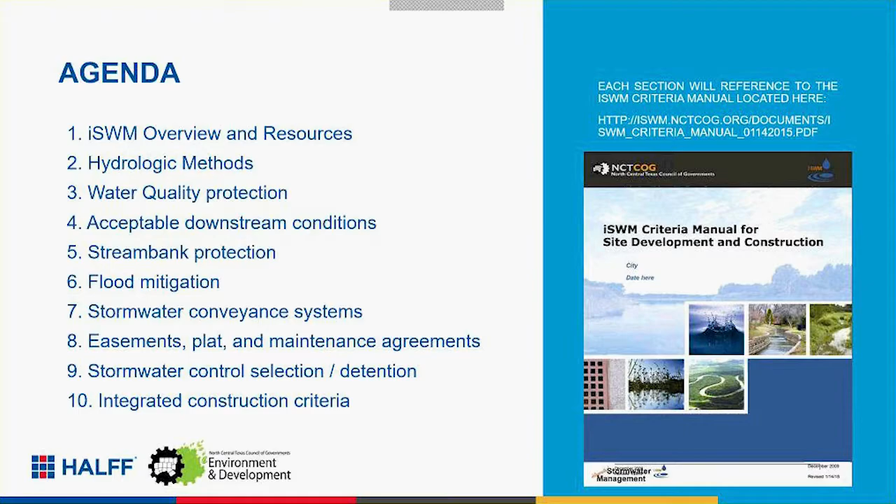So what was the intention of it? Why did it begin? Well, it was really a regional program to assist local governments. That was really what NCTCOG is all about. That's what the iSWM program is about - helping to manage the stormwater program and also the MS4 impacts. That was a big program in the last 10 years, and hopefully the iSWM program has helped to smooth that out, to help meet those requirements.

It's a collaborative effort, over 60 local governments. There's an iSWM subcommittee, which some of you participate in, that helps guide the program, which is a subcommittee of the Regional Public Works Council. So I'm giving a little background here. Right now, Halff is leading the team along with Urban Eco Plan and Tetra Tech as a consultant to the iSWM program. So just trying to set some background of what the iSWM program is.

Traditionally, there's been a lot of discussion about stormwater impacts and stormwater rulemaking and what future regulatory requirements could come up impacting stormwater. I brought this up to give a history. I think right now there's not necessarily anything really clear as far as where the nation is going with stormwater rulemaking. But historically, it's been something talked about quite a bit, whether there will be more stringent stormwater water quality requirements, maybe enforcement through the MS4 program. There's been a lot of discussion.

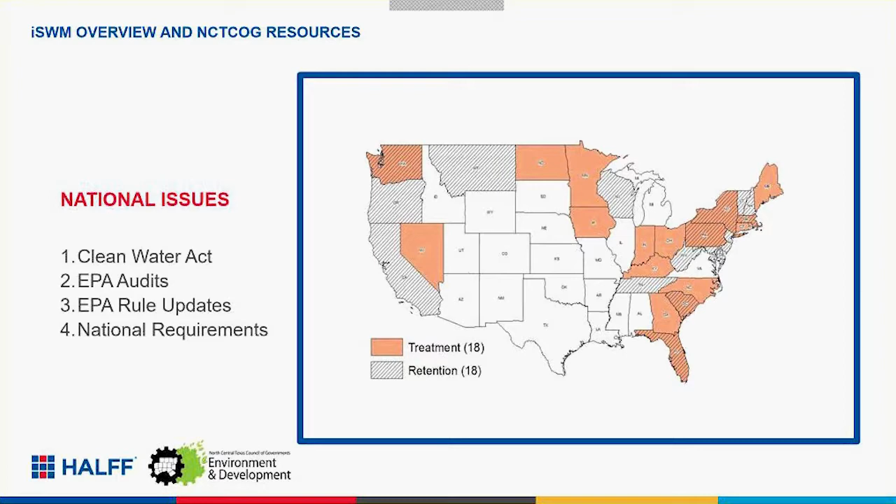So why iSWM? Well, we understand that increased runoff leads to flooding. We know there's impacts that result from that. We can't just pretend it doesn't happen. It does. We know it's streambank erosion - a very big issue for a lot of communities in North Texas. There's water quality concerns, stormwater regulations, and the loss of natural features. We continue to see development reclaim, take away, and lose those natural features we'd all like to maintain.

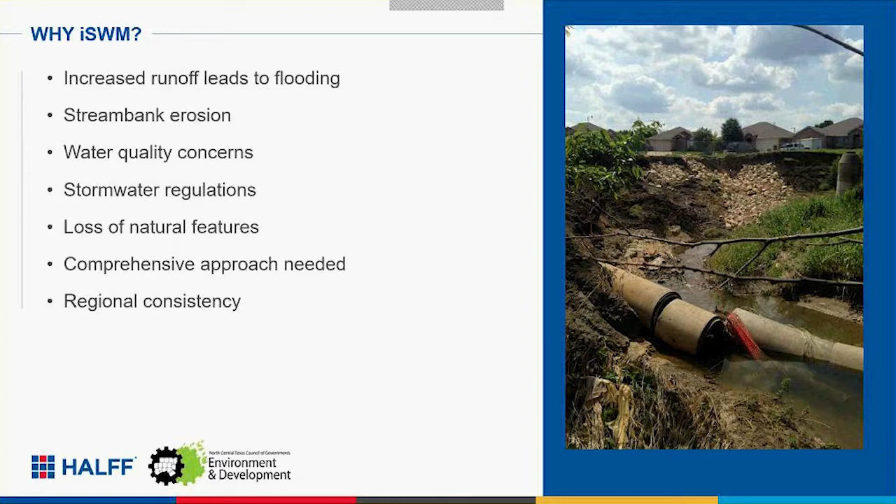So what iSWM provides is a more comprehensive approach, looking at it in an integrated way. We're going to use that word a lot, but it really is true - trying to look at water quality, streambank erosion, and flooding all as one. The regional consistency is a big part of it. Originally the goals were to establish a baseline of what communities would look at, and to provide some technical resources that communities could rely upon as we look at developing some consistency.

We all understand the age-old adage that watersheds don't recognize community boundaries, right? We can't just put up walls and do our own regulations and expect that we're not going to be impacted by each other. So we are all connected across community boundaries.

Some of the basics of iSWM - going back - is to address stormwater earlier in the development process. We gave this presentation internally as a vetting process for some of our engineers at Halff, and a lot of them were very young engineers, so to them it was just always a given that stormwater is something we look at early in the process. Now, it hasn't always been the case. Ten-plus years ago, a lot of times we were being handed site plans and told to go make it work. We're trying to get away from that, trying to educate and get people to consider stormwater earlier in the process.

The concept of multiple storm events - that's something we do very often in a lot of communities, which wasn't always done, and we'll talk about why it's important. Integrated site design practices - again, used to not take into account topographic features where you had natural areas you'd try to preserve. I think iSWM tries to highlight that and bring it up. Ultimately, we're trying to reduce the impacts, whether that's water quality, streambank erosion, or flooding.

I think most people would say that downstream assessments and looking at off-site impacts has been one of the really monumental or transitional concepts that's been incorporated, along with protecting water quality during construction.

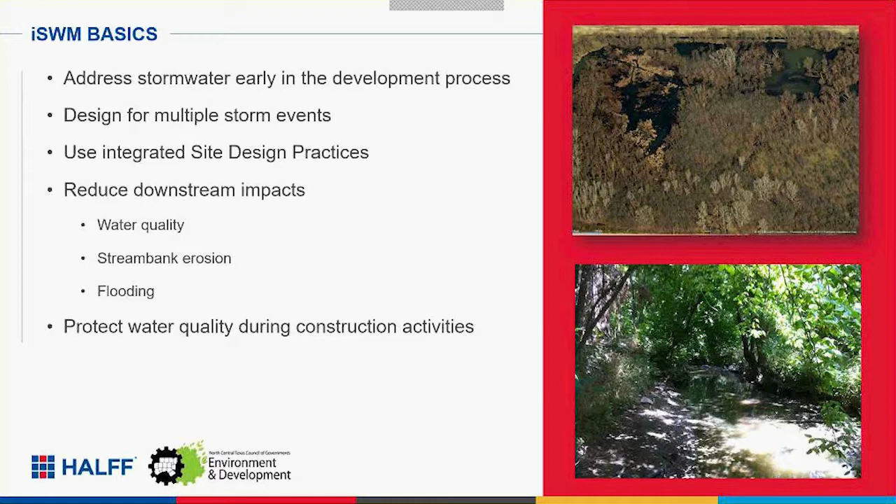Derica alluded to some of this. There are great resources available through the COG. First of all, you have the criteria manual, top left. This is through the website Derica mentioned earlier. If you search NCTCOG criteria manual, you'll find it. The criteria manual has excerpts shown right there.

Communities will take that and customize it to their needs and requirements. The technical manual is more scientific and doesn't change a whole lot. How do you calculate capacity for an inlet? It doesn't change day to day, it's pretty much the same. These are the equations and methods, a more technical reference manual. It's exactly what it is, and it's a very good one.

People use it across the state. We have experience with a lot of folks outside the region who just want to see how somebody else is doing something. They'll pull this up, and it's a great resource.

Tools and training include a lot of archived seminars that people have given over the years, whether that's bioretention or downstream assessment - there's an entire presentation just on that. There's great tools and training, and program guidance with supplemental guidance documents on how to apply the iSWM manual.

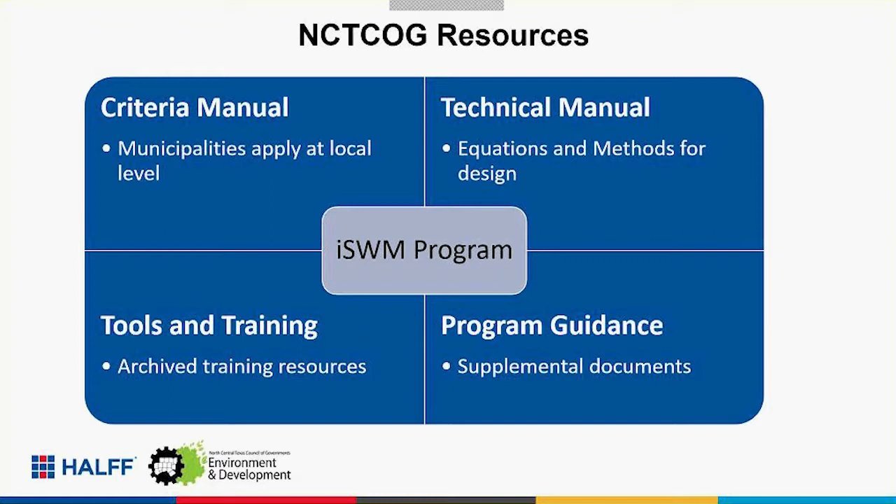So this is what Derica mentioned earlier, some of the iSWM communities. You can see the timeline of when different folks have adopted iSWM. Going back to 2006, Fort Worth and Grand Prairie adopted it then, and you see a lot of other communities have joined since.

In 2014, there was a shift from adopting iSWM to more of a points-based metric, or an outcome-focused implementation. This is on the sheet Derica has at the back of the room - it shows a lot of the communities that have adopted iSWM and have been certified. Several of the ones up here on the screen were certified.

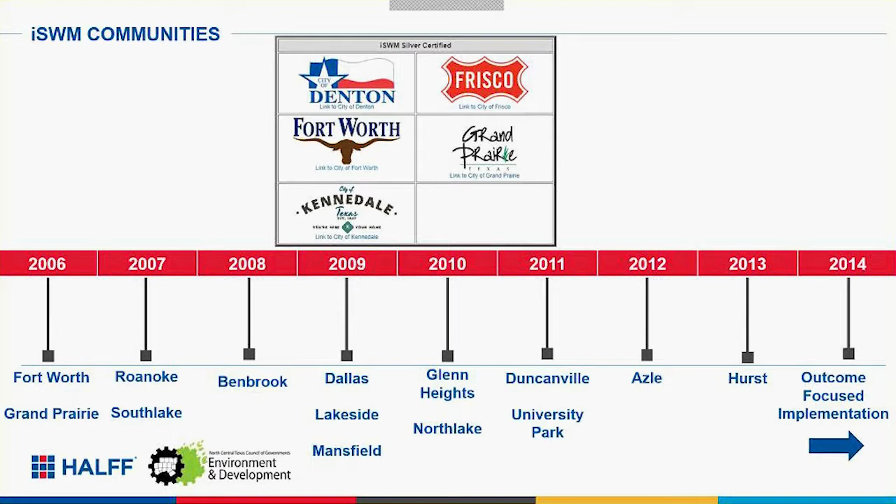That's really the focus of where iSWM is headed now, this outcome-based implementation. So you may not want to adopt the entire iSWM manual, but maybe you have your own downstream assessment, looking downstream - that would be something you'd get credit for. There are a number of different metrics like that. For communities looking to become iSWM certified, at the end of this work effort we expect there will be ordinance language available for people to adopt to implement different iSWM measures.

With that, I'm going to go ahead and turn it over to Scott. He's going to go through the hydrologic methods.

All right, thanks Ben. As Ben mentioned earlier, I'll try to keep it high level, more concept driven on some of these sections we're going to go through. I know in some of my slides I have numbers relative just to the COG manual specifically, but each community has different numbers and different technical criteria. Anyway, I'll try to keep it high level today, so let's jump right into hydrologic methods.

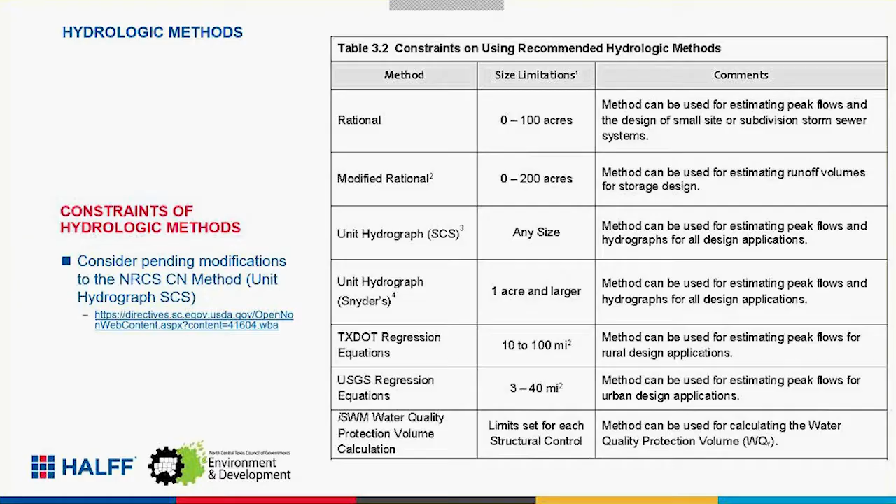Okay, so we're going to go through some lessons learned, as Ben mentioned from the beginning. Based on feedback, preparing iSWM submittals and assisting in drainage reviews throughout the COG region where iSWM criteria have been adopted or iSWM design principles are being applied. So we'll go through a few of these for each of these sections.

Okay, so first with hydrologic methods, one of the big things we see is off-site drainage areas that aren't shown or aren't taken into account. So you can see the site here, the big red outer boundary with all the colors in the middle. This is your site, your drainage area map for your site.

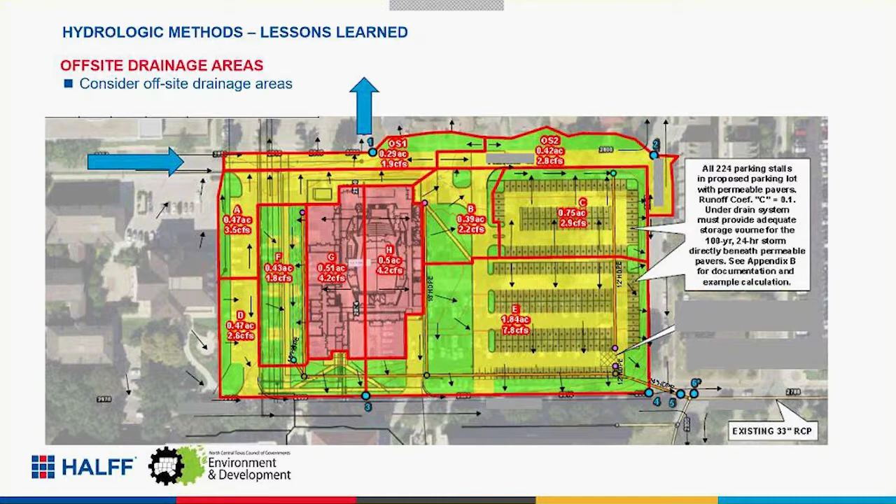But what's not shown here is your actual off-site drainage areas. You can see these big blue arrows up to the top of the screen. Now, if you were to just take one of those basins from your site and calculate how much you've increased going to the north, you may find out it's not that much, and maybe I'm fine downstream, it's not too big a deal. Now you actually bring in that off-site area and combine that with whatever you're increasing from your site. Well, now you may actually have so much water going north that the increase you have now may actually be an issue. So you really need to take into account off-site drainage areas.

I think this next exhibit shows the bigger picture. This blue site would be what we were showing at that red boundary, just your proposed site. Then you have this large off-site area here off to your left. So when you combine that, coming up here to the north to discharge point A, and take that into account with your local flow that you're increasing, well now you have a totally different analysis leaving point A when you start looking at a downstream assessment.

As far as point B over here, you actually have a large offsite area contributing to an underground storm drain system, in this site in particular, tied into that system. So you're going to need to be aware of all these offsite drainage areas draining to features that you're going to contribute to. And I'd say not just the offsite areas that are going to contribute to existing systems, but maybe offsite areas that actually flowed through your site that you're going to have to convey.

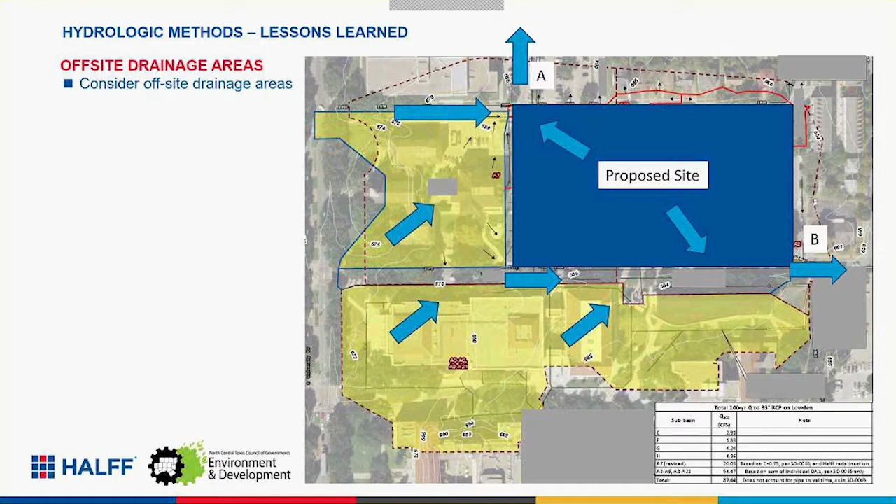Are you in the upper end of the watershed? Are you in the lower end? Kind of middle? Is there a major highway nearby? Is there a creek nearby that you plan on discharging to? Is there an old neighborhood just downstream that may be undersized? I think it's just kind of a good idea to use this as a tool, just for planning purposes.

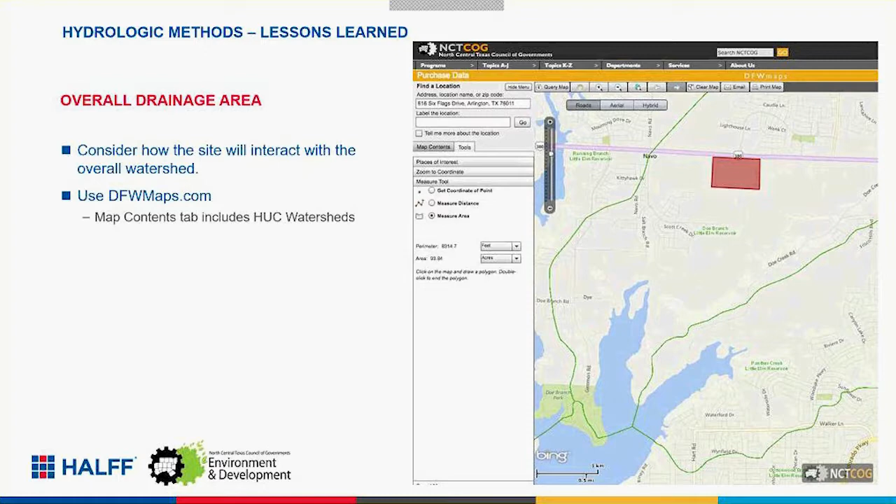Okay, and another lesson learned I want to share was impervious areas. So if you take a site and just blanket apply a C factor of 0.8, now you could do that, but you may have multiple discharge points from your site.

So if you applied 0.8 to this area that's actually 0.3, you may end up having to run some analysis on this pipe that you didn't really have to do. There's potential there for saving your clients some money. But then also, you maybe say, hey, it's at 0.8, but in reality, it's primarily all paved. You may be closer to 0.9.

So you just need to be aware of knowing your discharge points from your site, how many they are, where they're located, and looking at these impervious areas on a more micro level, seeing how this may impact my different outfall points if I was to actually calculate a weighted C for these basins.

Go ahead. Yeah, sure. What do y'all think about that? I mean, a lot of times we have paved area, we have building square footage. It seems like that's something that's pretty straightforward as far as something to calculate.

But we see a lot of people trying to use land use. I think that's maybe a carryover from before we really had the detailed aerials that we have now, and the things we can use to develop those impervious percentages. But a lot of times it does make a pretty big difference, I'd say, on the site.

So is anybody else seeing that? Does it seem to be an issue? Not really?

Okay. Well, I know Ben mentioned at the end of each of these little sections we have a chance for some Q&A. I would appreciate your feedback. This is a chance to open up discussion to you guys. Y'all have any questions or any thoughts, in particular hydrologic methods?

In one of your earlier slides, you have a note about pending NRCS modifications. Yeah, the methodology. Yeah, Ben, you want to answer that?

Yeah, I don't know if you've seen it, I haven't dug into it enough. So here, let me swap with you there, Scott. Michael, you've got a mic here as well, so chime in if you've read into it more. But it's my understanding, basically a coalition of different folks looking at that type of thing, people fairly into the equations and the rationale and justification for how those different equations are developed. They went and looked at it, and they had some concerns about the way it's being applied now.

And obviously, the SCS method was originally meant for soil conservation and things like that. It's my understanding, just reading through some of the notes, and it's available online, if anybody's interested you can email me afterwards, I'll send you the notes. And Michael actually pulled it out originally.

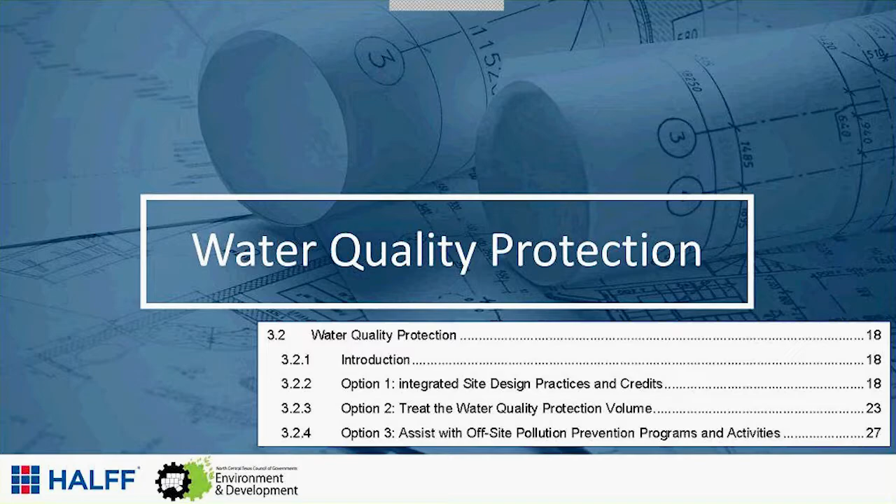So I'll get off my soapbox there and start moving through the lessons learned. I could probably talk about water quality all day, and I know no one wants to do that on a Friday afternoon. So I mentioned there are three options.

You have the integrated site design, which is a points-based system. We're not going to go through all the ins and outs of those, but it's included in the criteria manual. I encourage you to read through that and look at it. And as you do that, if you start having some thoughts and questions...

What would make it easier for you as a reviewer or a designer to integrate this type of design development review into your processes? What can we do with iSWM to make it more palatable to the design community, and easier to track for your communities? That's what we want to hear. That's the feedback we're looking for over the next few years as we work to modify iSWM and add to its usability.

The integrated site design, as I said, it's a point-based system. It's based on really 4 practice areas. It tries to encourage the conservation of natural features and resources, and it tries to encourage the use of low-impact design practices.

It encourages the reduction of impervious cover and the utilization of natural features. And the utilization of natural features is really saying, hey, take a look at your site. What are some of the natural features that exist beyond just the floodplain? Where are the natural features such as natural swales, natural riparian areas, et cetera, that exist that you could utilize as part of your open space requirements, but also as your stormwater management requirements.

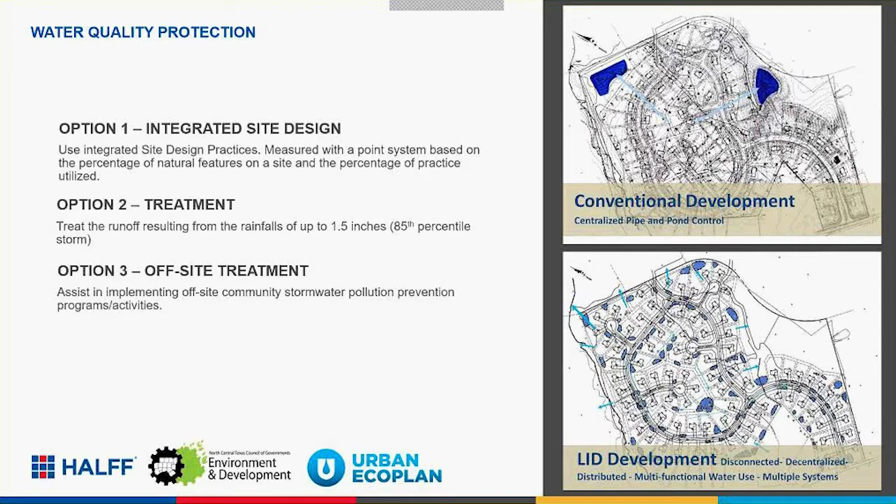And what's great about this is that there are so many resources available that go beyond looking at floodplain. There are GIS resources available from Texas Parks and Wildlife, from TNRIS, that you can quickly overlay onto a site before you even start the site plan process, so you can identify these natural features that can be integrated into these designs and actually make it much simpler to add these points to your iSWM application if you go that route.

And the second one, this is the one that we see most frequently, and that's treating the water quality volume, the 85th percentile rainfall event. I know there's been some discussion about whether the 1.5-inch rainfall is too much or too little. Ben, did you want to add anything to that discussion?

I don't know if there's been any changes recently. No, I don't think anything's been changed from that. So as it stands now, we're looking at the 1.5-inch rainfall. But in all honesty, depending on the site, whatever volume that you can feasibly treat is beneficial. So if you can't quite get to that 1.5-inch volume, treating a 1-inch volume for the site is going to be beneficial in the grand scheme of things.

This is helping us really start to address total suspended solids, and one really big issue that we're going to see now and in the near future is how do we start managing floatables, trash, and debris, and that's going to be part of this water quality volume treatment as well.

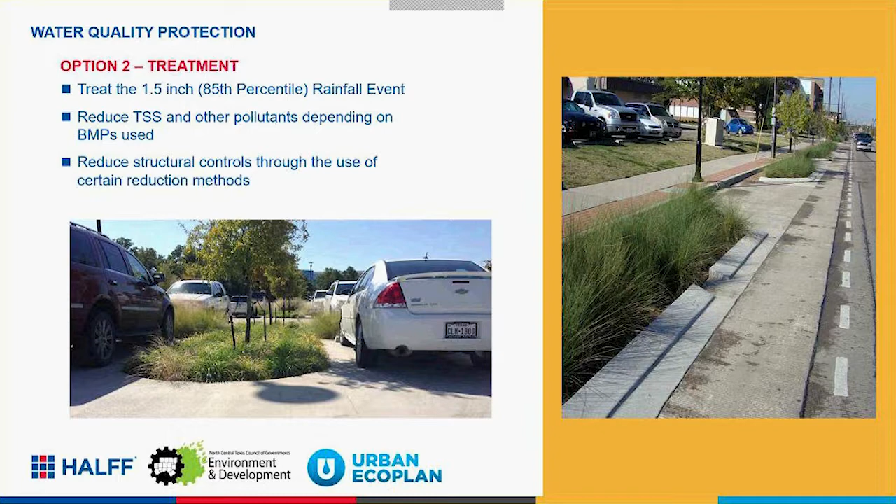So if, in the grand scheme of things, we're trying to improve the water quality in Rowlett Creek, which coincidentally is our latest creek system to be added to the 303D list, which means it's impaired. It's impaired by elevated levels of bacteria, so it technically doesn't meet standards for recreational use now, which is the same impairment that the Trinity River has.

Some other issues that we have with Rowlett Creek are debris, trash, and floatables. And it's going to be important to address that because that obviously is one of the major contributors to one of our largest water sources in the Metroplex, Lake Ray Hubbard. So we have all these communities involved, including Dallas Water Utilities, who manages the reservoir.

Those are a lot of constituents that have to be on board for a regional approach to actually improve the water quality in that watershed.

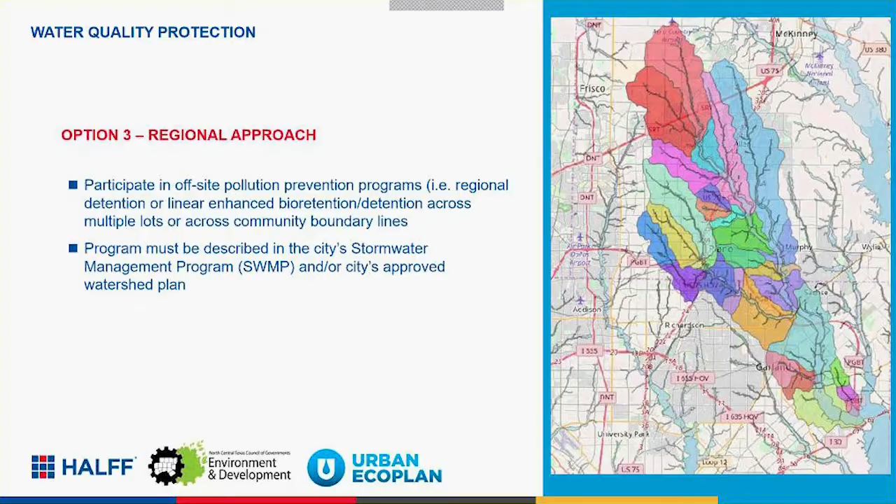So again, that's one of the important things to keep in mind. Where is your site located? What are the opportunities to collaborate with other communities to start inching towards that regional approach? And it can be a single site.

When we're talking about larger developments, let's say in Frisco, the understanding that development is impacting Rowlett Creek downstream, theoretically, if there's not enough room on that site to treat the water quality volume, potentially there's a park downstream in the city of Plano that could help achieve that volume. So that's what starts those discussions between the communities, and it starts with that single development and the impacts it might have.

So, the lessons learned—I'll stop right there and see if anyone has any comments related to regional water quality in general, any challenges that you face as a designer, challenges you face as a reviewer at a city.

I have a question. I'm actually from Washington State, and designing for water quality was built into our design there. So making sure we were accounting for that stuff was part of our design. But when I came down here, I noticed it was not. So is it community driven, or is it driven by the client? Because it does create increased cost to the client, right? To do water quality is going to be more financial cost to them. When we start, as a designer, as an engineer, if I start incorporating those types of things into my design, it's a cost to them, right?

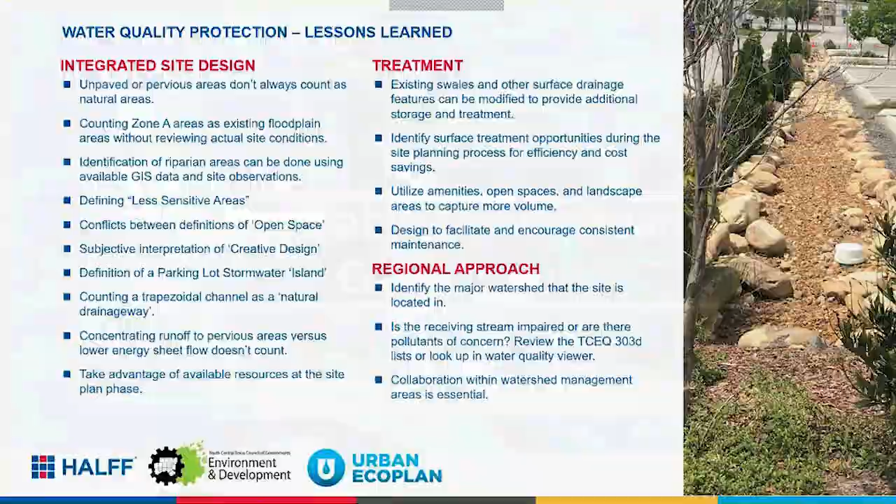Thank you for the question. I think that's a good conversation.

The next section we're going to get to is acceptable downstream conditions. We're going to attempt to cover a lot in a fairly short amount of time, so I'm going to really lean on you guys to bring up your questions and experiences.

As I said before, I think most people in the industry have acknowledged the downstream assessment as being one of the more impactful components of the iSWM manual, both in terms of refocusing where exactly you have to evaluate your impacts, and also being a kind of paradigm shift in the way that we look at it. We're going to go through a couple of examples and talk about it, but first it's important to understand the purpose of what the downstream assessment is.

Because a lot of people would just say, oh, let's go build detention, and you're done, we don't have to worry about it. Some people have taken that approach. The downstream assessment is attempting to come at it from a little bit different perspective.

So you're looking at it, and the focus is the same. We're all trying to protect downstream properties from flooding or velocity increases caused by upstream development.

I don't know who wrote this originally. The criteria manuals kind of get shared around, right? Somebody comes up with the concept and different people do it. So I don't know if we could track who originally came up with the concept of a downstream assessment or a no adverse impacts, but I have to think it was probably as a result of legal precedent, because I think that's where a lot of this comes back to — you're trying to provide defensible evidence that a proposed development does not impact downstream properties.

So as engineers and as communities, we see a lot of liability associated with that. And what's the first thing that happens? We've all got an example. We could probably go down the row here of a development that goes in, and somebody downstream floods a few years later, and what's the first thing they do? They say, well, I never flooded before. This property wasn't here before, so obviously I've correlated those two and said that I flood because of that person.

A lot of times, if a community can quickly bring out a piece of paper and say, well, we've proven that that's not the case because we reviewed this downstream assessment or this evaluation or this analysis to show that they were allowed to go in — if you can provide that document quickly, a lot of times you can avoid a lot of conversations about that fact. If it doesn't appear that a very thorough analysis went into that, you can see that conversation kind of grow. You can see people start to get more concerned and more leery about it. So defensible evidence, I think, is one of the more important things that you have coming out of a downstream assessment.

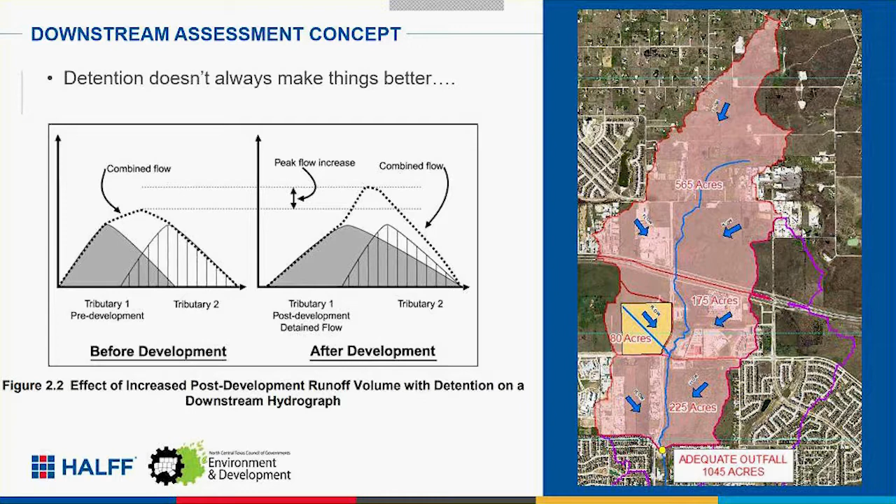So the process, when performing a downstream assessment for a site, gets very similar to what Scott said earlier. The first thing you want to do is identify where your outfalls from your site are. A lot of times all of my site goes in one direction, but sometimes it splits in two, half my discharge goes this way, half goes that way. In that case I've got to evaluate both outfalls, there's no way around it. If I'm chasing downstream impacts, I've got to chase it everywhere that water is increased or leaves my site.

So the data collection is getting better and better. We've got more resources, we've got GIS, a lot of people have georeferenced plan sets. I can get the data more easily than I could 10 years ago, I don't think there's any doubt about that. Having that data is going to make this an easier and more seamless process.

To determine the downstream limit, we're going to touch on that on the next slide. We want to figure out how far do we have to go, that's the question a lot of people have tried to answer.

How far do I have to go downstream? Because I may just go 1,000 feet, and then I may come in and talk to somebody, and they say no, you got to go a lot farther than that. Well, now I got to go redo my analysis, right?

So that's one of the real concepts of why you'd want to have these discussions early in the process. That's why there's a preliminary iSWM submittal that's suggested, so you can sit down with somebody and say, here's my site, here's about how big it is, here's my watershed. I think we ought to go down here to this sump inlet, or down to that bridge. Don't you agree? Based on the areas, I think that's a pretty good stopping point. You can have those conversations and agree on how far your analysis goes.

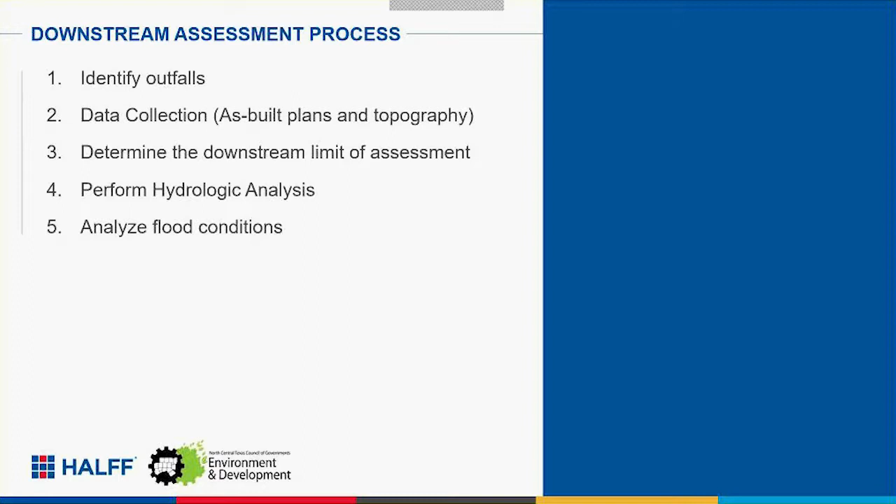So we're going to go into the downstream assessment methods. I'm going to hope I get these right, because we're going to go through a couple of examples. I want to get it thoroughly and communicate it right.

So the adequate outfall: it's any location that you've determined to be an acceptable outfall that does not create adverse flooding or erosion conditions downstream. All right, so that's the long version. So what does that mean?

You might want to tell me, what would you consider an adequate outfall? Would we consider a major river, the Trinity River, an adequate outfall? A lot of people would say yes, some people might say no. It's kind of up for each community to determine what they consider an adequate outfall. But you can interpret that in a lot of ways.

A lot of communities have plans, as-built plans. I can tell you that along this road, we designed this pipe 2 years ago, and it was designed for this much Q. Are you bringing more stormwater, more drainage to it than that Q? If the answer is no, a lot of communities will tell you that pipe was designed adequately to convey your site, and we agree that's an adequate outfall. You can move forward. Some communities will say your runoff coefficient was less than that pipe was designed for; if you can prove that to me, we'll consider that pipe adequate.

So there's different things that people consider adequate, but ultimately you're looking to determine a location that you don't need to analyze downstream. If I could get my water to there, I'm good, right? And this kind of goes to the basics of what we do in engineering a lot of times, is you're trying to answer that question even before we had defined what adequate outfall was.

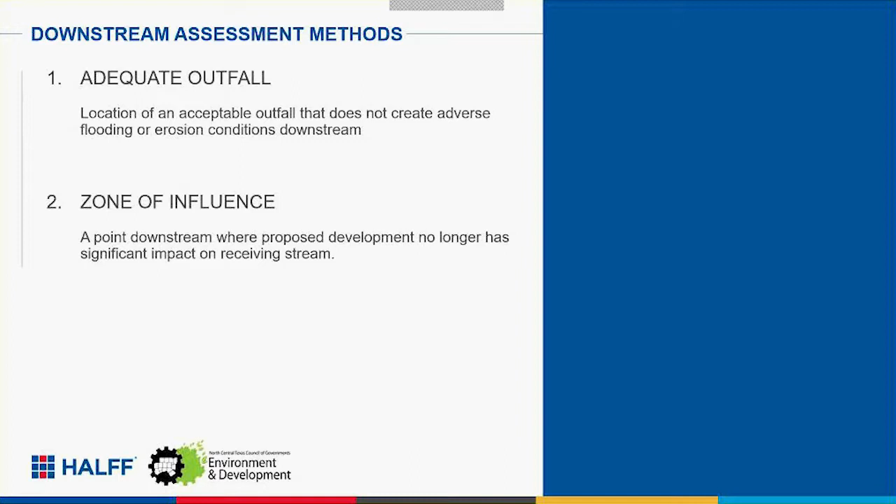So this is where some rules of thumb come in. We're going to go straight into the lessons learned as we look at a couple of examples here. And I'm going to go backwards, so hang with me here for a second. I think we'll start with this one.

So the odds of my impacts to that watershed having any impact downstream at that point becomes statistically negligible by most studies. They've looked at a lot of different sites, master drainage plans, and a lot of other data. Statistically speaking, when you're 10% of the overall watershed, you're probably okay. You're probably not going to run into that situation with the hydrograph timing we talked about earlier. So that's kind of a general rule when you want to figure out how far downstream to go.

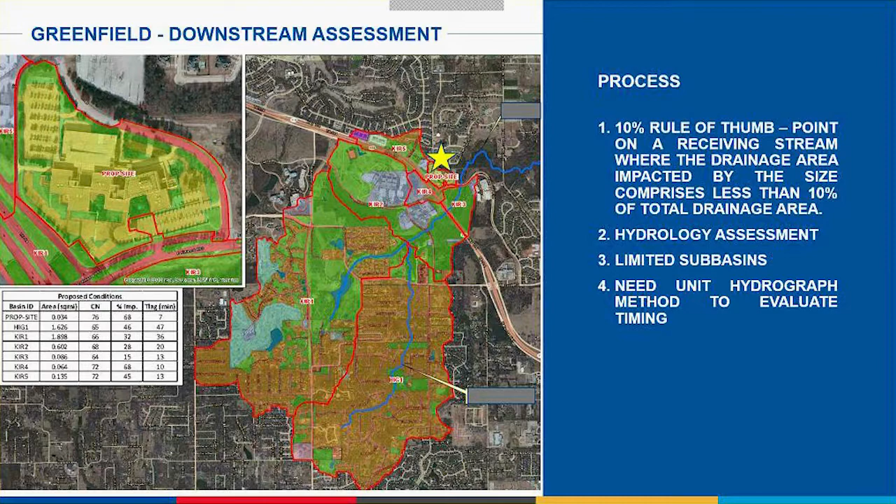So, Ramin, you recognize this one? Okay.

So I had to check first.

So the idea of an adequate outfall is, a lot of times, you're going to look at either a master drainage plan, a watershed study someone has, or what Grand Prairie has here, which is they basically looked at the capacities of all their pipes. In my opinion, that's really developing that adequate outfall for you, or telling you whether you have an adequate outfall or not.

This is all based on fully built-out conditions. So if you were to develop in these areas, you'd know you've got capacity issues on this pipe. I know that's not an adequate outfall because Grand Prairie has already pulled the plans and run the analysis. They know their runoff coefficient, and that pipe was designed and built several years ago, and doesn't have capacity for the development coming there.

So you know all that coming in. When someone goes to buy a property, they know that. What this has done is moved forward the identification of the adequate outfall to where somebody should know that immediately—they shouldn't have to do much analysis. So I think that's one route, a lessons learned or a useful tool.

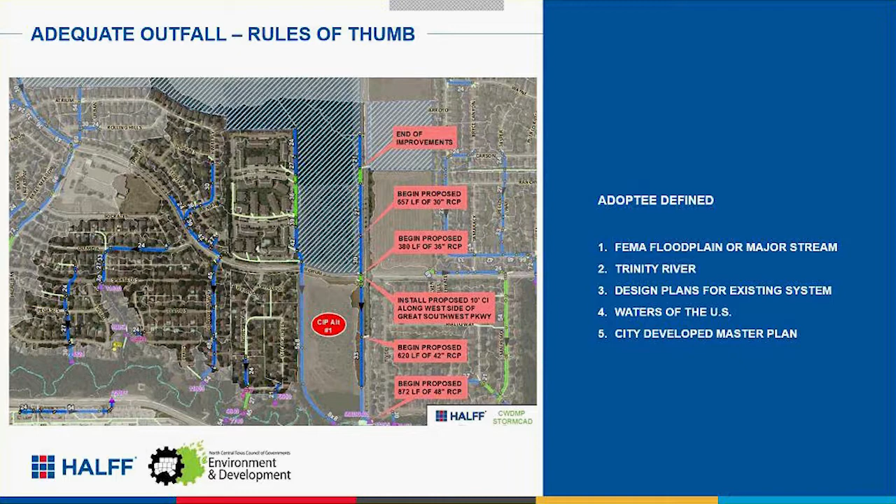So that would be an idea of the adequate outfall. Like I said, not everybody has this information. In the absence of this information, if I was going to develop on that site, I would go pull those plans and see if it was designed to convey the capacity of my site. If it was, then I can identify an adequate outfall. I can provide those plans, show where I haven't changed the drainage area or the runoff coefficients, and my Q is less than what that pipe was designed for, and I can go on about my business.

So we'll throw out one more. The first one we looked at was a greenfield site, and that comes up quite a bit—we're looking at more riverine conditions, hydrographs, larger watersheds. But a lot of our cities are really trying to focus on infill, this redevelopment, just bringing growth back into the core.

And that creates its own set of challenges, its own set of issues. So I thought we'd be really missing a big part of the conversation if we don't talk about that infill development and how that occurs. In this case, it's a redevelopment area that was a residential area that someone wants to transition into more impervious, adding impervious area here.

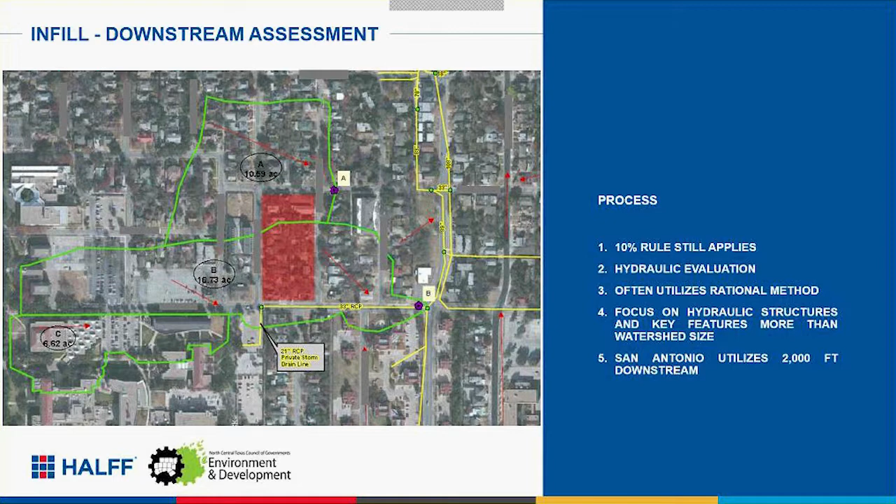Thank you, Remy. All right, on to stream bank protection. I guess this is still me. I'm going to keep going. I was looking to pass the baton there. Y'all saw me, so we'll keep going. These guys are going to chime in and tell me what I do wrong, maybe afterwards.

But okay, so let's assume we've done our downstream assessment. We figure out, guess what, we don't have capacity downstream, or we have a stream bank erosion issue downstream. Now what do we do? We want to just figure out the answer and say it's okay, we checked it, and just check the box and go on. But okay, we can't check the box. You've got a highly erosive stream downstream. You're increasing velocities to it, and we know we're going to have an issue. So what are our options?

There's three options here. You can go through and reinforce or stabilize that downstream condition. You can go off of your site and try and stabilize it so it can convey the water that I'm bringing to it, or the negative impacts I'm potentially causing on it.

Option two, I can install stormwater controls to maintain the existing downstream conditions. So let's say it's not terrible yet. Let's say it's starting to potentially have some issues. Well, I can address those conditions on my site such that I'm not making it any worse. I can prove that I'm not making it any worse. So if I can do that, then I can meet the requirements of option two.

Option three is that I can control the release, and this is of the one-year, 24-hour storm event. I can contain all that water on my site and release it over a 24-hour period. And that release is such that, statistically speaking, by people that have looked at this a whole lot more than I have, if I can release that water over 24 hours, the odds are it's not going to contribute significantly to the stream erosion or stream bank erosion downstream.

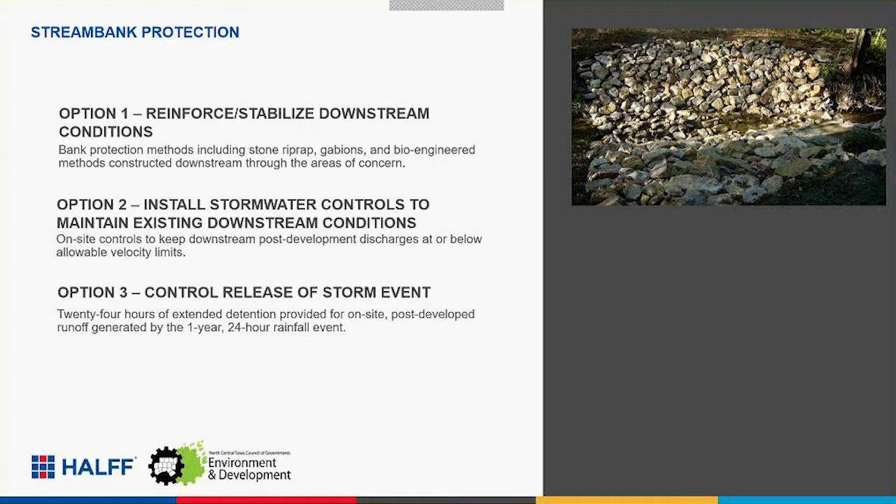To some extent, in some cases, it feels like that with erosion. If you're the first person into a watershed, I don't feel like you can get far enough away from that creek, because you know it's going to move. You just don't know exactly where it's going to move or how it's going to move. So it's very unnerving, I guess, when you get into that. And so just some things to think about.

All right, so some lessons learned. There are people looking at this, especially at the watersheds that aren't already fully developed - the outstretches of the region where people have mostly undeveloped creeks that are starting to develop. They've seen the issues it's caused in the more urban areas that have been developed for 20 years. You can see how that creek is downcut, how it's widened. So they're trying to be more progressive in some of these areas and make people look downstream.

In situations where they're causing major velocity increases, there are situations where they may have to go downstream. You may have to put in some grade control structures. You may have to try and ensure that stream is not going to downcut as a result of that development. So there are people out here that are concerned about it and trying to learn from the situations we're in, in some cases.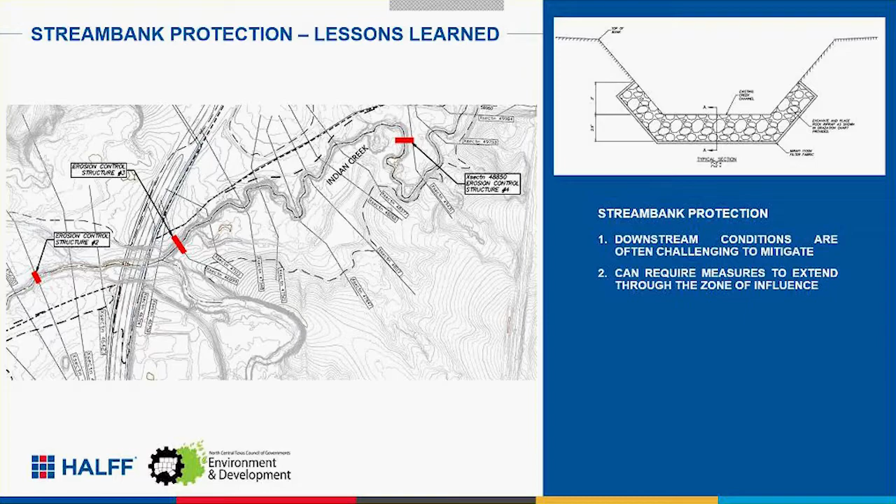Gonna mess anything up? Did I get it? Broad overview, it's good - a lot more things to drill down on. Yeah, absolutely, you could get much more in depth. We could do an entire two hours just on that probably.

So, flood mitigation, very similar situation. I've looked downstream, I've got flooding issues - just like Ramin said, I've got a hot spot identified downstream. I can't increase discharges here. I don't have an adequate outfall, and I know anything that I do is only going to make that situation worse, and I can't do that.

So my options: I can provide the adequate downstream conveyance system. This was the question earlier about who goes first, right? Who builds the pipe? If the city hasn't built that pipe yet, am I going to go downstream and try and improve that system so that I can develop my site?

Option 2, install the stormwater controls to maintain the existing downstream conditions. This would be the situation where maybe I do something on my site to make sure that any increase I've caused is not negatively felt by those downstream.

And then option 3, in lieu of doing the downstream assessment, in lieu of doing all of that off-site, there's an option to simply maintain the existing runoff condition. So I've done detention, put in stormwater controls or low impact development, or some combination of all of the above, and I've shown I'm not increasing the runoff downstream.

So with that, any questions, comments, thoughts on either of these two, streambank or flooding?

Option 3 is normally easiest for infill development where they already have impervious cover. That's a good point - option 3 being easier for infill development, right? And a lot of people will choose this. A lot of people will say, I could go analyze it and figure out it's not going to be an impact, or I'm just going to detain.

I'm just going to be done with it. Some people, it's a timing-wise decision where they've got to make a decision right now and don't have all the analysis yet. So they say, I know if I design a detention pond, I'll be good, so let's design it now and build it and not worry about it. So it's a good point.

Anybody else? And those detentions can be an amenity - a lot of them are used as retention, and that adds to the community. Right, right, some really good examples of that. So yeah, a lot of them become multi-use facilities and things like that, and we'll get into that probably a little bit more here in a second.

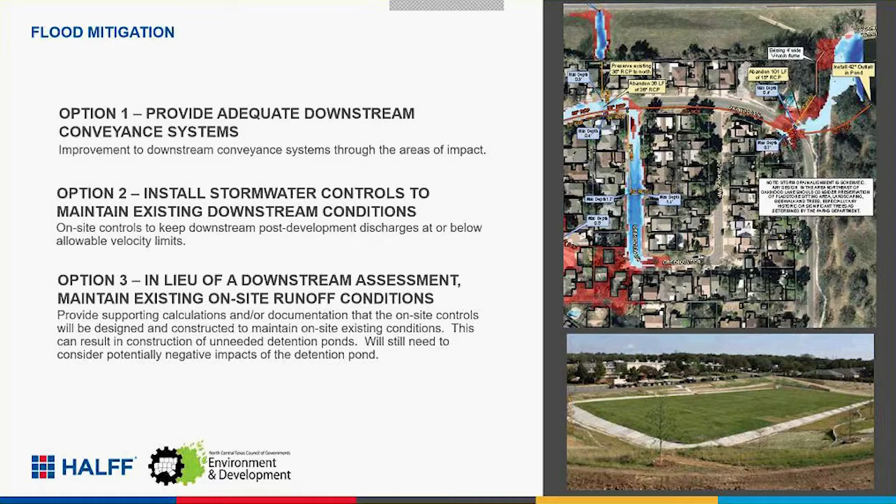So, all right, we'll keep on moving. Stormwater conveyance systems.

All right, if your brain's turned to mush yet, too much, ready to keep going? All right, stormwater conveyance systems. So realize we're getting a little short on time - I'll try to get through this. I want to make sure I get your feedback.

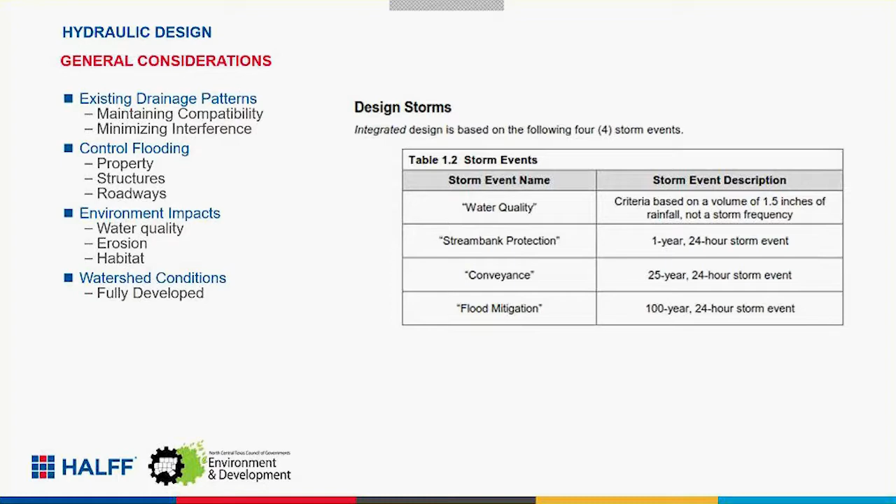So I know we mentioned design storms a little bit, I'll hit on it here since I'll mention these a couple times. There's the stream bank protection, conveyance, and flood mitigation storms. Won't hit much on water quality here. The COG manual says stream bank protection is the 1-year storm, conveyance is the 25-year, and flood mitigation is the 100-year. I'll use these terms throughout. When I say conveyance storm, I'm referring to the 25-year from COG's perspective. That changes from community to community, so when you do a site plan or an iSWM submittal, you need to know what community you're in and what events need to be considered for your analysis.

Okay, so streets and stormwater inlets. We'll talk about depth of flow in the streets. You need to consider the conveyance storm, which shall not exceed the top of curb or maximum flow spread limits. And then the flood mitigation storm, the 100-year storm, shall be contained within the right-of-way or easement.

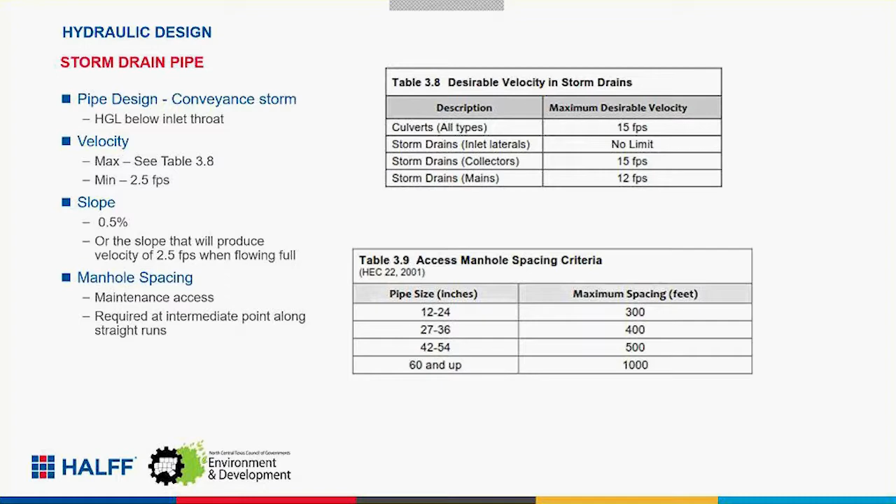Okay, so hydraulic design of open channels. The design frequency would be the flood mitigation event, or the 100-year event. And I want to really hit on this multiple stage concept when you do a channel design. So you want to have low flow, high flow events kind of in mind.

The idea being you want to try and mimic what's going on in nature. So if you're going to put in a channel, you want to try and mimic what would go on in nature. There's going to be your low flow events, maybe your everyday events, and you want the channel to be able to have a path for those. And then, since you're designing for the flood mitigation event, your top of banks are going to want to be able to contain that event with a foot of freeboard.

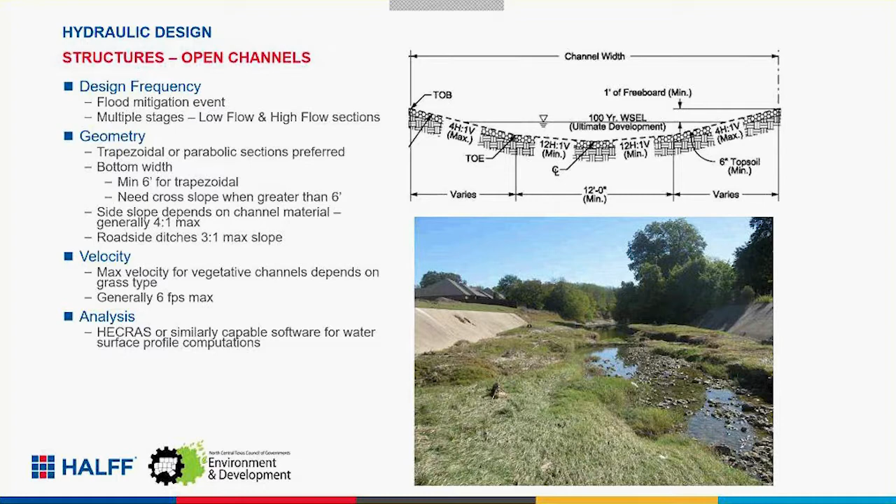Okay, culverts and bridges. I'll go through a few requirements here for culverts. The design frequency there is also that flood mitigation event, or the 100-year event, and you're going to want to have at least 12 inches of freeboard at the lowest point in your roadway or pavement.

Tailwater is a big thing I've seen with culverts, needing to know what's going on downstream. Are you in a true free outfall type situation? Are you discharging to an open channel where you may need to have some sort of staged storage curve downstream, so you know what kind of tailwater impact you have and what you're tying into? Culverts in series, if you have multiple culverts, you need to take that upstream headwater from your downstream culvert and make sure that's your tailwater for your upstream culvert that you're designing.

And then lake or pond, obviously you need to know if you're going to be tying into a lake or pond, what that elevation is, what is that max elevation going to be considered for a tailwater condition.

One thing I have noticed, when you put in a culvert, you can create kind of a damming effect with the water backing up. That can have a significant impact on properties upstream. I've seen that on a couple of reviews where you can see the water surface increase by 2 feet, 3 feet upstream, and that obviously has a big impact. If it's your own property, maybe that's okay, maybe you've considered that, maybe it's your own little open space, and you've designed accordingly.

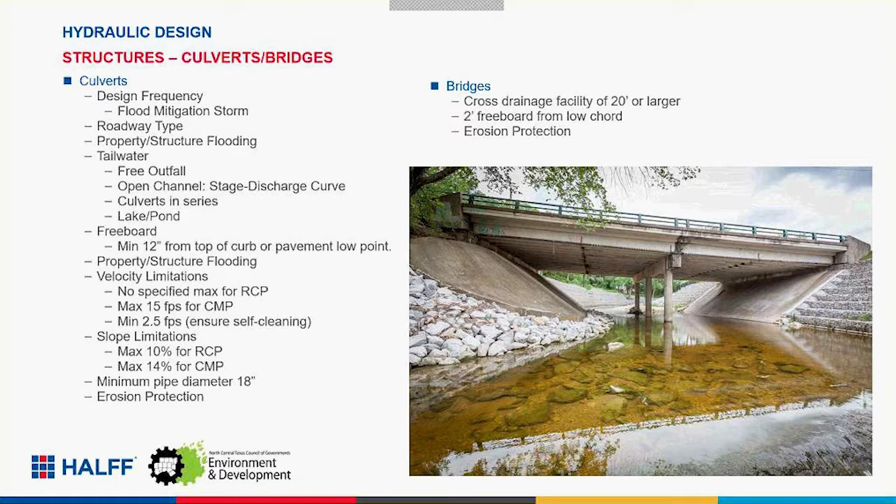Okay, detention - everyone's favorite subject - is where we have a lot of concerns. It can be confusing at times designing a detention pond. It can be an iterative process. I think it's fun, I enjoy doing it. Maybe that's not the case for everybody.

With detention ponds, you can use the modified rational method according to the COG manual. There are adjustment factors in the modified rational method when you use the COG manual. It's very common for someone to submit a design for a modified rational method calculation for a detention pond within an iSWM community, but maybe they're not aware that there are actual adjustment factors that apply. That's really to account for undersizing. What it does is scale up your rainfall, and you end up with a higher volume requirement, which consequently affects your outfall design and so on.

So be aware of those adjustment factors when you're going to use the modified rational method - you need to be considering those. Those are in section 1.5.2 of the Hydrology Technical Manual that Ben mentioned earlier. There's a good link to that on the COG website. But be aware of that for sure. Obviously, you can use detailed unit hydrograph methods - that's probably always the safest, best way to actually route water through a detention pond.

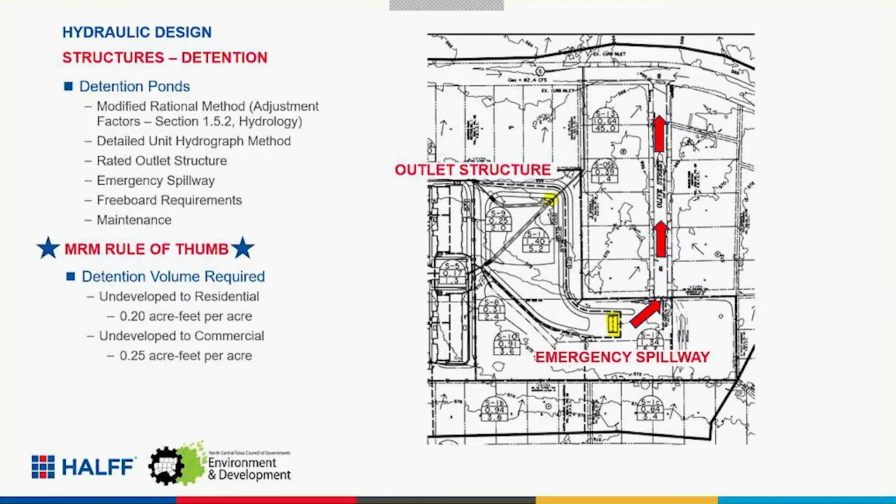This is Stephen's slide. I'll sit here and talk. You can, I'll stand there.

Sure, so I just had some other lessons learned. We do detention pond reviews for some of the municipalities we're doing reviews for. Sometimes engineers like to use PondPack or another proprietary model to do their detention pond design. They'll submit their plans with a note that they used PondPack, but there's very little information, making it hard to review those plans. So if you're submitting a project with PondPack or a proprietary model, remember to include that model with your submittal so the engineer or city won't have to ask for it down the road.

Like Scott said, include all the applicable storm events. Check with the authority you're working in. If they use something different than what the COG shows for iSWM, make sure you're using those storm events and checking each one of them.

A good rule of thumb is to show your final stage storage and discharge tables to confirm that your post-project flows do not exceed the pre-project flow requirements. It's an easy check for the reviewer to see if the post-project is lower or equal to pre-project. Also show the same stage discharge elevations if you have a riser box or outfall detail, to scale, showing where the 1-year, 25-year, and 100-year events are. It's another good check for reviewers to make sure your design is correct.

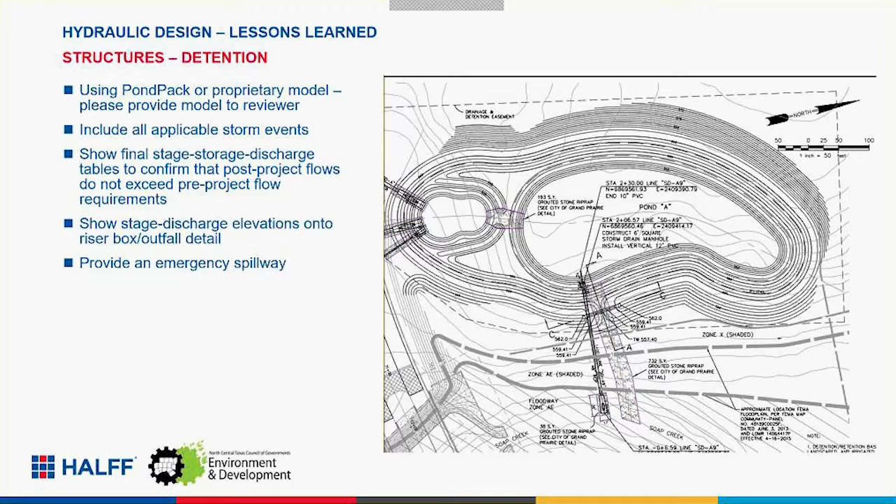Let's go to the next slide, Scott. There you go. Just a couple more lessons learned.

Some authorities require landscape and irrigation plans to go with your detention pond design. Check that, and if required, include it on your first submittal, so it can be reviewed to make sure your detention pond has proper vegetation, landscaping, and irrigation. Sometimes the authority requires a fence around your detention pond, so make sure you understand what type of fence is needed and include that with your plans.

Sometimes the pond can be constrained on site because you don't have as much area, so you may need retaining walls. If the walls are over 4 feet high, make sure there's a structural design included for those walls. Also, if your pond is going to be bounded by walls, make sure you have good access into the pond for maintenance, like a ramp to get down into the pond. Then provide a maintenance plan on the detention pond plans for future maintenance.

Those plans, along with the plat, will ride with the property over time, so it's a helpful way for future owners of that site to understand how they need to maintain your pond over time.

And again, look at your downstream conditions, what you're draining into. Are you draining into something that's free-flowing? Is there going to be some kind of HGL downstream that you need to consider to design your pond? So those are just a couple more lessons learned that we have from some of the reviews that we do.

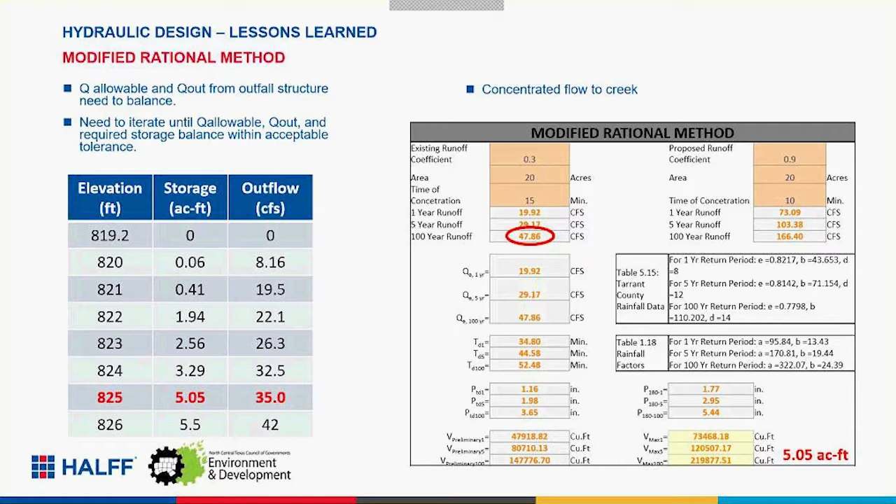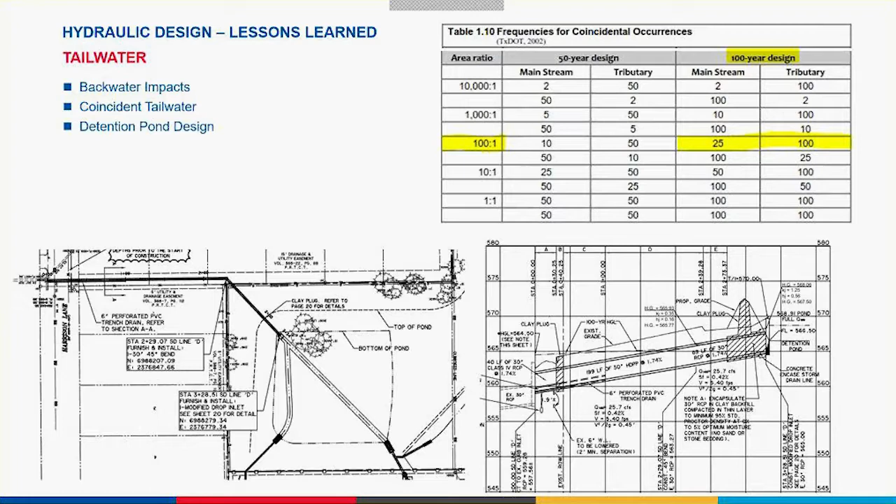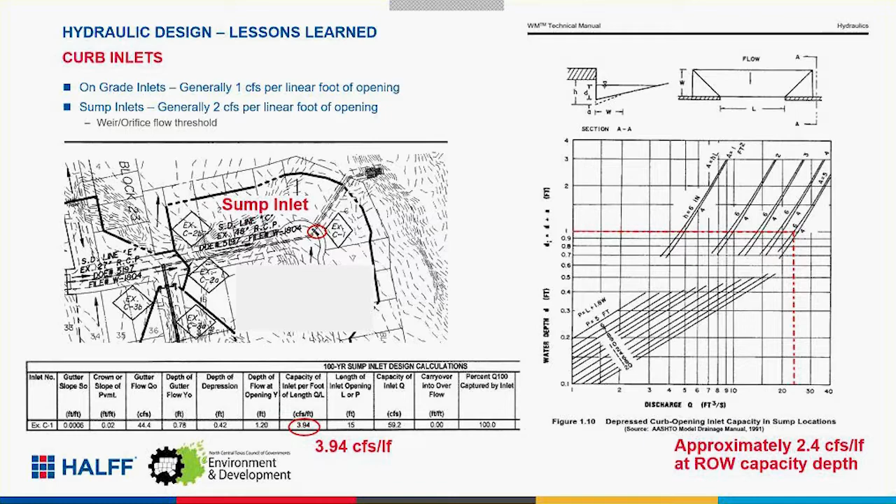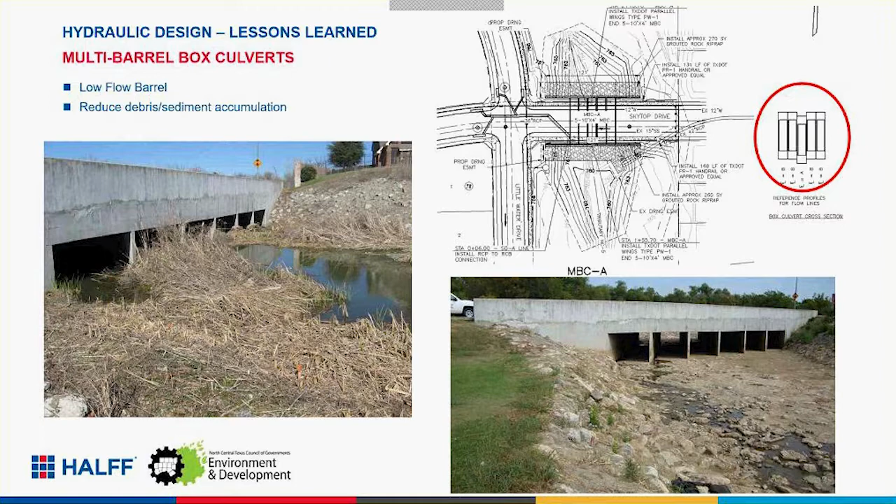Touch on this real briefly. I hit on it earlier about mimicking nature in your designs. When you have multiple barrel box culverts instead of a bridge, ideally you'd want to include maybe a low flow barrel, so you can convey those everyday events or more of a low flow condition. This is one example where you can see there's a lot of sediment built up on the picture to your left. All those box culverts are at the same elevation. Here, this is after it was cleaned out—it was roughly half full. I just think maybe a low flow barrel could have helped that situation a little bit as far as debris and sediment accumulation.

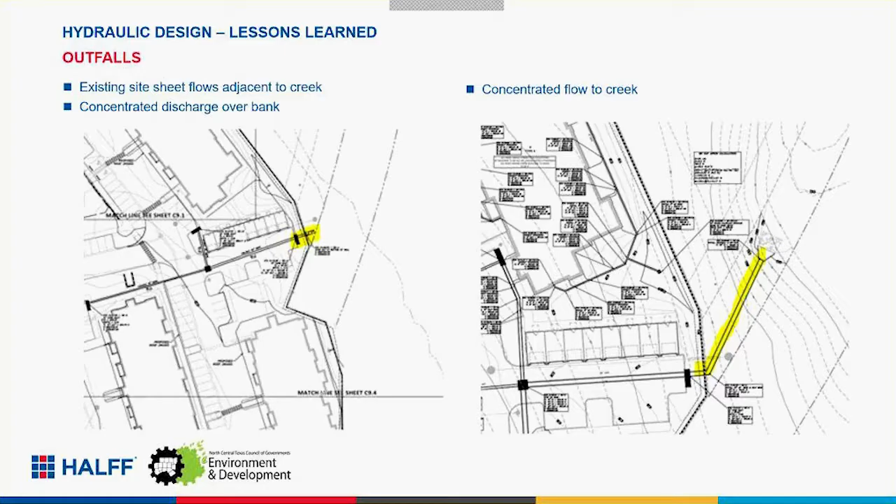Okay, turn it over to Stephen. Any questions? Any thoughts on that? Okay.

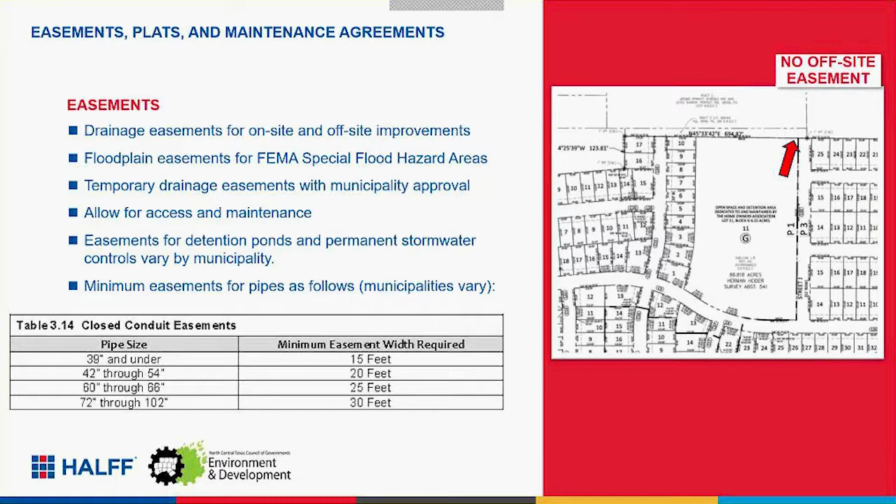A plat should include public and private easements, and any easements to be recorded by separate instrument. You may have a certain type of drainage easement that was done previously just by deed, and if you're going to plat that area, you need to include that information on your plat. Include any floodplain easements that are required by the municipality.

Provide a legal disclosure on your plat for any drainage provisions, and that just kind of rides with the property if it's sold or transferred to someone else. Then include, in your plans, documentation of the maintenance responsibilities that each of these plats have, and any agreements that include the transfer of responsibility upon sale of the property.

Here's a site that has a detention pond easement by this plat. This is one property, but there are actually two other properties to the north that drain into this detention pond. So this property and the other two all have agreements on who maintains this pond, what happens if the pond gets clogged, just so all entities know, if you're draining to that pond, how it needs to be maintained and who's going to be responsible for paying for any improvements. All that kind of rides with the property.

And again, maintenance agreements and plans. Some municipalities require your maintenance agreement, or your pond maintenance agreement, to be on the plat itself. Here's an example, I don't want you to need to read it, but I broke out some parts of this. First, the city of X is not responsible for the design, construction, operation, and maintenance or use of that detention pond.

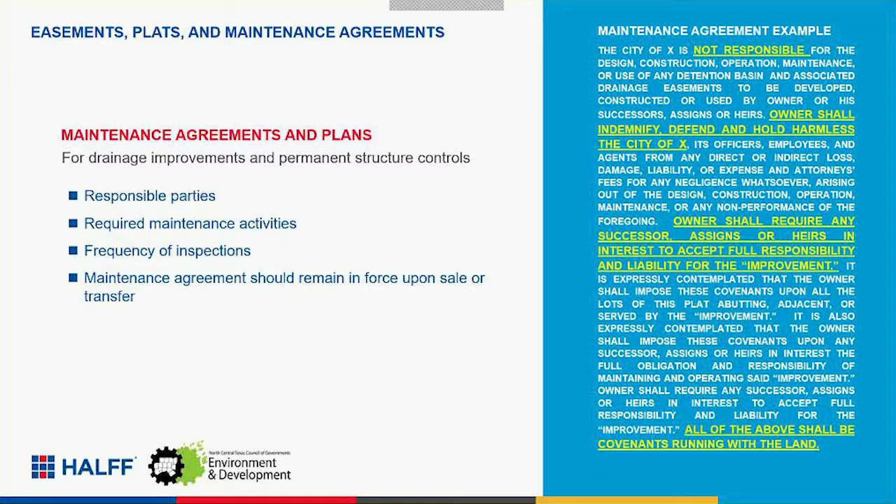If you don't include this in the plat, will the reviewer come back and say you need to add this? Yeah, if that municipality has this requirement, sometimes this is located in the drainage criteria manual, the type of drainage maintenance agreement that particular municipality wants to have. And if it's not shown on there, that's the comment—it's got to be shown on the plat. So drainage reviewers are not only just reviewing drainage plans, but we're looking at the plats too, to make sure adequate easements are there, adequate language is also there. That's usually one of the first things we look at.

All right, here's just a good example of what happens when you don't provide downstream easements. You can prevent drainage—if you don't have it, it can prevent drainage through adjacent properties without your easement. As you can see here, there's multiple properties. This is kind of the upper end of this basin. The water's flowing all the way down through here, going through all the backyards of these properties.

No easement was included for that drainage. Over time, people build fences, they block the flow. The water's not going where it needs to go anymore. And it becomes an issue that we have to look at and study to find out where the water's going. All this could have been prevented when this property was developed, to include those easements and have adequate drainage through there. So you understand this is the corridor for drainage to flow, you have to maintain it, and it's clearly identified how that's maintained and who's responsible for maintaining that.

Any questions on easements?

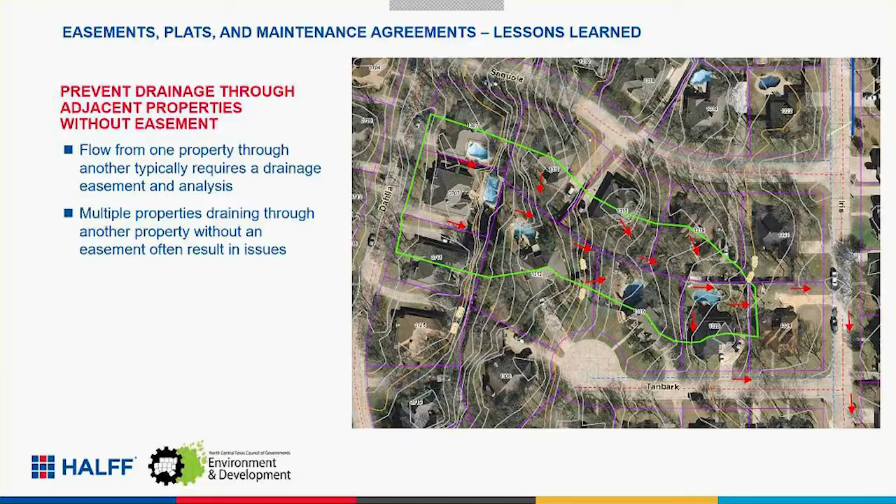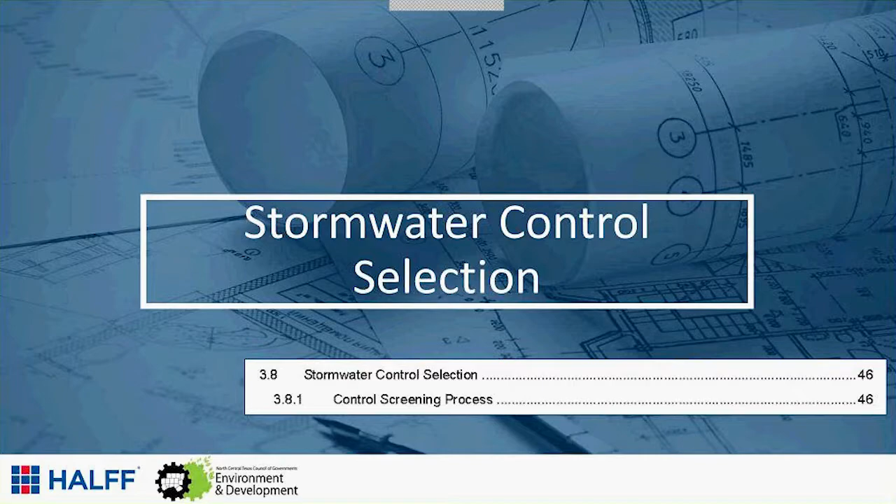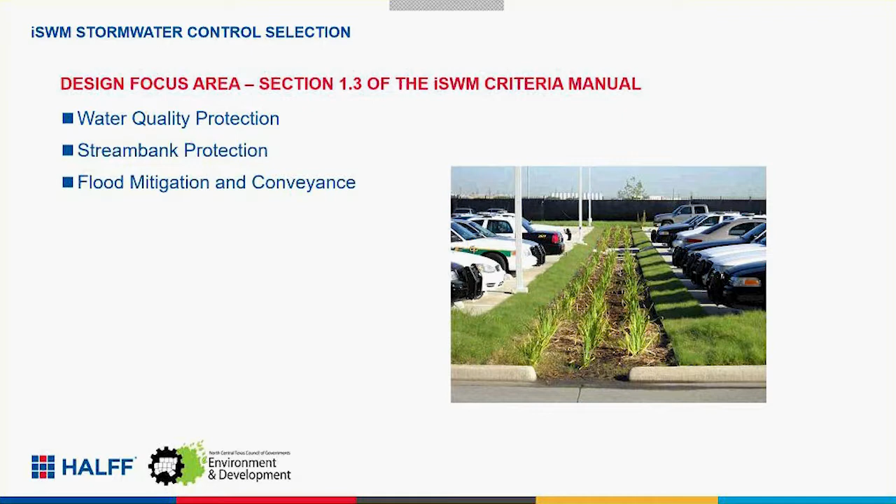All right, I got 10 minutes, I'm gonna fly through this. Now we're about to enter the matrix—this is the matrix section of the iSWM criteria manual, section 3.8, stormwater control selection. This is a screening process you can use to identify what stormwater controls you need for your project. You can follow along—if you find section 3.8, you'll see all these tables in here. So again, your design focus area is either going to be water quality protection, stream bank protection, flood mitigation, and conveyance.

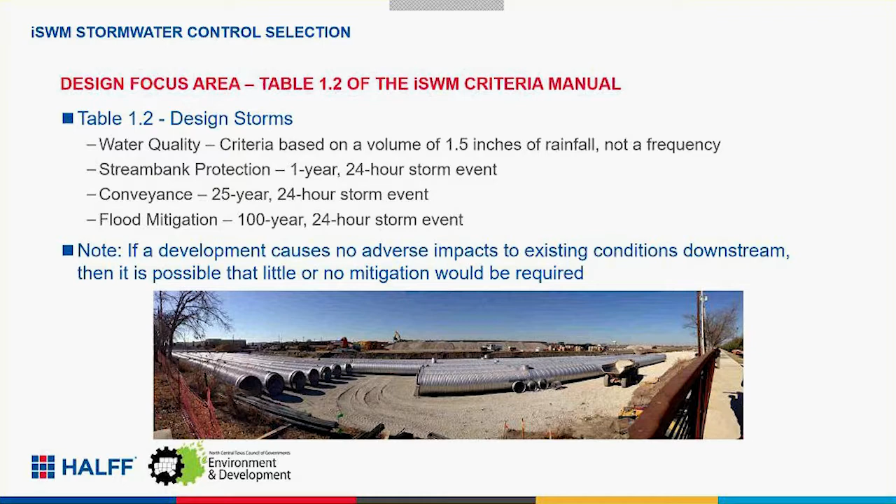Again, Scott mentioned the design storms you're looking at. For stream bank protection, 1 year; conveyance, 25-year; flood mitigation, 100-year. Note, if a development causes no adverse impacts to existing conditions downstream, then it's possible that little or no mitigation can be required.

All right, so section 3.8.1, there's 4 criteria for evaluation. You're trying to treat both water quality volume or water quantity control—it could be both, or it could be just one of those. There's 4 different matrices that you would look at. First is stormwater management suitability, then relative water quality performance if you're looking to treat water quality volume, your site applicability, implementation considerations—those are the main 4 criteria.

Once you find out what stormwater control you want to use, there's 3 additional criteria that you look at: physiographic factors, soils, and also special watershed or stream considerations. So again, this is just kind of a screening process. You're trying to figure out what types of control you're going to use, go through these matrices and figure out what you need to use for your project. Also, you need to consider any environmental regulations in regards to where structural control is located—you don't want to put your big pipe right in the middle of a wetland, so be aware of those types of things.

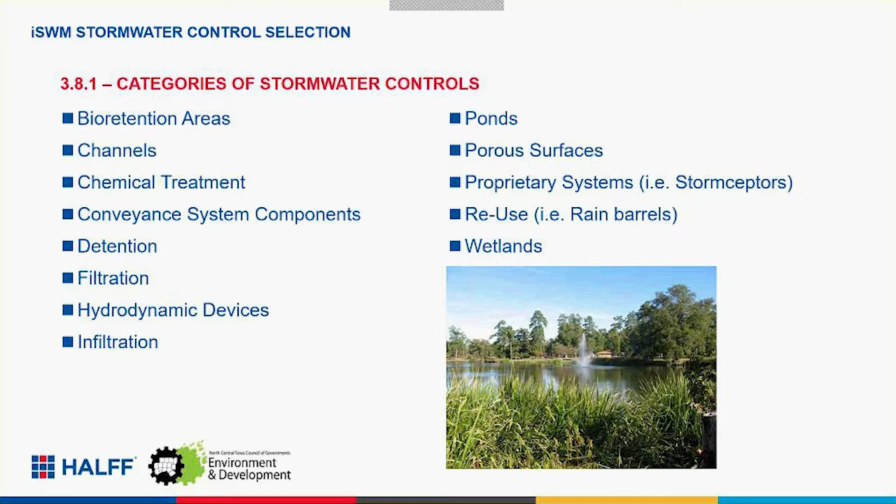Each of these tables has different categories of stormwater controls, from bioretention areas to detention, infiltration, ponds, wetlands. So each matrix has those in there, so you can see—do I need bioretention? Is this going to work for my project? As you go through those tables, all right, so we'll start with table 3.15.

So this is stormwater management suitability, and this includes all your categories of stormwater controls. You can look and see if this is a primary control for water quality, stream bank protection, on-site flood control, or downstream flood control. I listed some of the ones that are satisfactory as primary controls for each of these different types of features.

So if you're looking at water quality treatment for your project, bioretention can be used, ponds and wetlands can be used, or you may have to use a proprietary system. If you're looking at flood control on site, you may want to do detention, or ponds or stormwater wetlands. And if you're looking at downstream, same thing - detention, ponds, or stormwater wetlands.

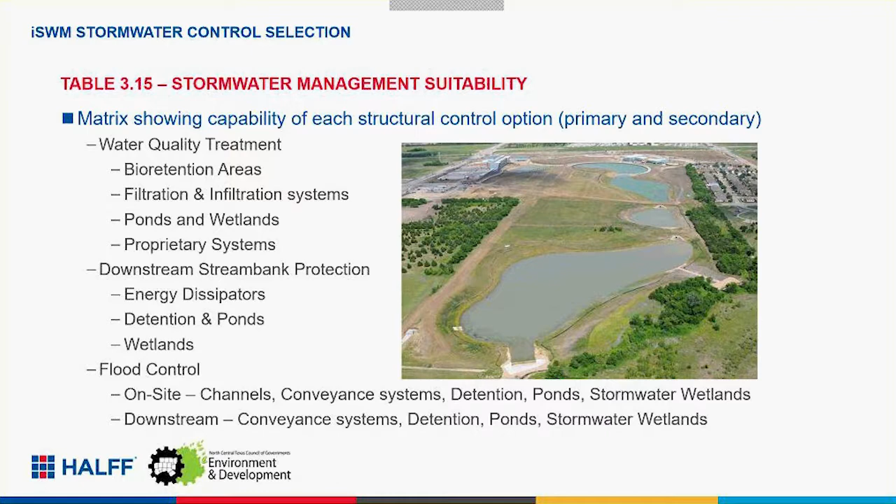So you pick your category, you move on to the next table, table 3.16, the next matrix. This is for water quality performance. So if you're looking to include water quality for your project and you know what type of water quality treatment you need, you can look at this table to see if you meet the requirements.

The first column is the TSS sediment removal rate. I listed a few things on here - usually you shoot for 80%. For bioretention, it does provide 80% TSS or sediment removal rates. It also has information on the amount of nutrient removal rates, bacteria removal rates, and also hotspot applications.

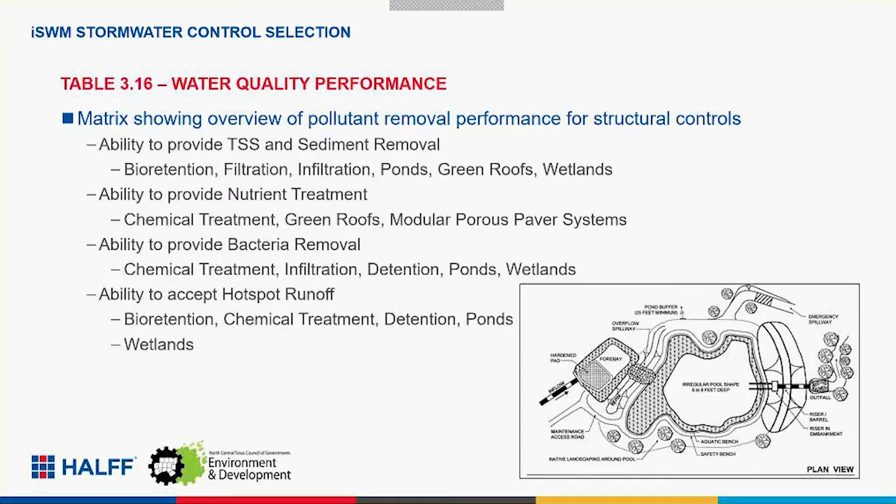Hotspot runoff, those would be areas that could treat, if you have gas stations or industrial facilities or different types of runoff that needs to be treated through there. Again, this is a screening process, and you're using it to help decide what stormwater control you need.

Table 3.17 is the next one - site applicability. This gives you a broad range of different areas to see what works for your stormwater control. It looks at drainage areas, the space required for your project, for the stormwater control itself, what site slopes work for this type of stormwater control, the minimum head required.

You know, if you have a detention pond or a pond, how much head do you need to pass that water through in a gravity situation? And then also depth to water table - are there circumstances where you need to provide a certain depth of your control above the stormwater or above the water table itself?

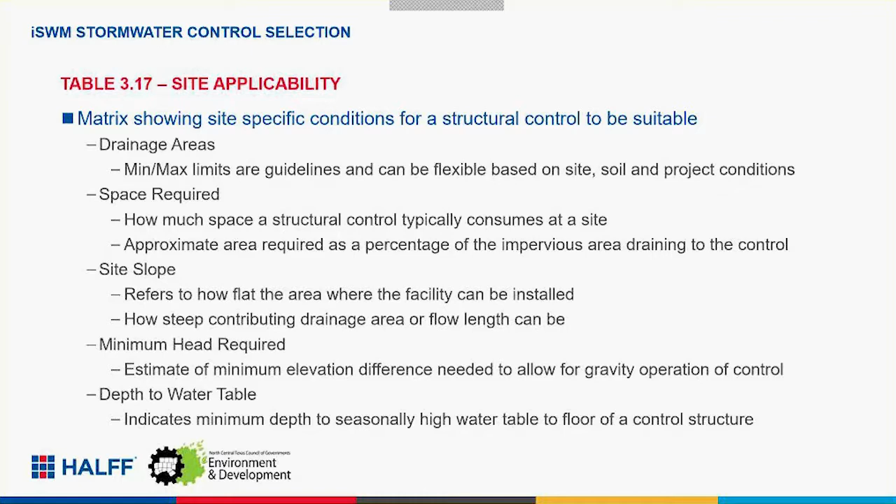And then the last of the four is the implementation considerations. So again, you look at your stormwater controls that you're considering, and it tells you, can this be used for residential subdivision? Is it a good application for that? Is it good to use in a high-density urban area? It also tells you if this is going to be a high capital cost or low capital cost or something in between.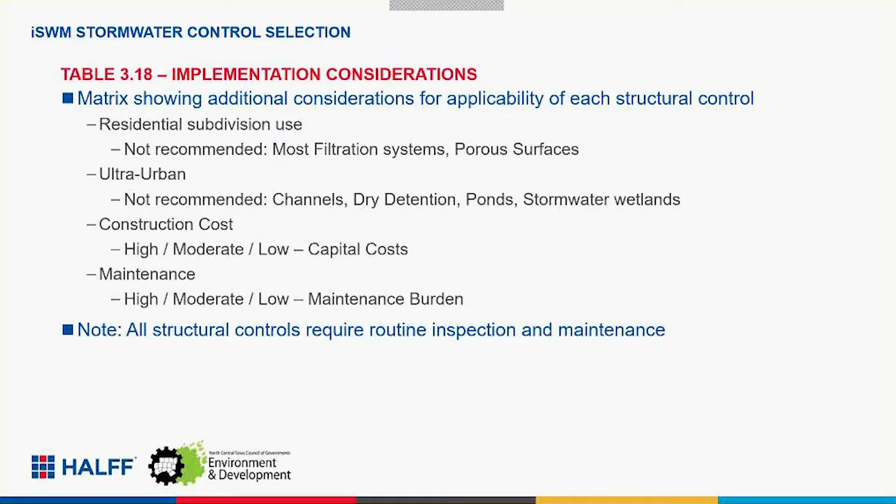And also, what's your maintenance burden going to be? Are you going to have to spend a lot of money to maintain this over time? So it gives a lot of good information as you screen your project.

All right, then moving on, you get into your three specific categories. The first one is the physiographic factors. This tells you, not for every control, but for some of the controls, some things you need to think about if you're in a low relief area. Say you're in a low relief area and you want to use bioretention - it says to ensure that there are several design variations that will likely be limited by the low head in those flat areas. High relief areas, it talks about those, and those are mainly west of the Fort Worth area.

And then also the karst areas, which are kind of limited to portions of Palo Pinto, Erath, Hood, Johnson, and Somervell counties. You can see them right here as this region, the far west part of the COG region.

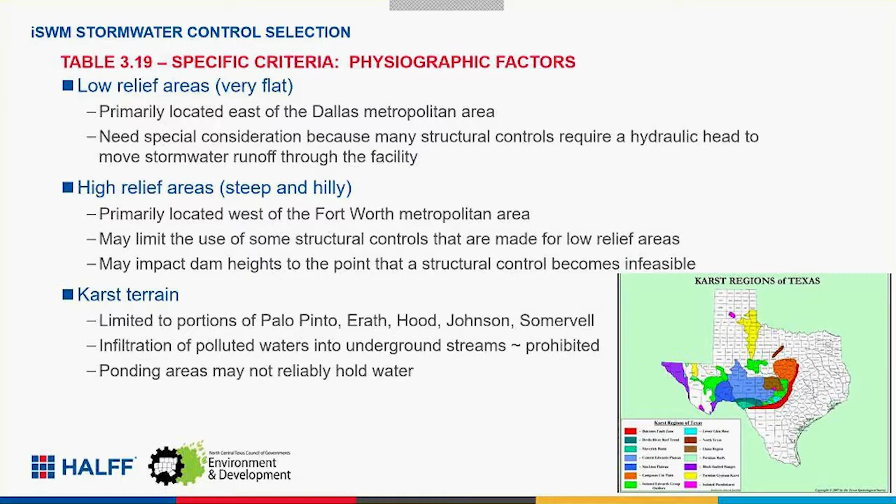And then finally, the last one is the specific watershed or stream conditions. This tells you just a few more things about the stormwater control you have. You may want to place it on a high-quality stream - this is a stream with a watershed impervious cover less than approximately 15%. So you may be one of the first projects to do on that watershed, so you really need to think about what stormwater control you're going to use and how it's going to impact that high-quality stream.

Some watersheds have a reservoir in them. They may have drinking water protection, and that's just watersheds that deliver surface runoff to a public supply reservoir or impoundment - it may require additional treatment. One offhand example I can think of is Lake Arlington. In Arlington, they have special requirements for developing your site within that watershed that drains to Lake Arlington.

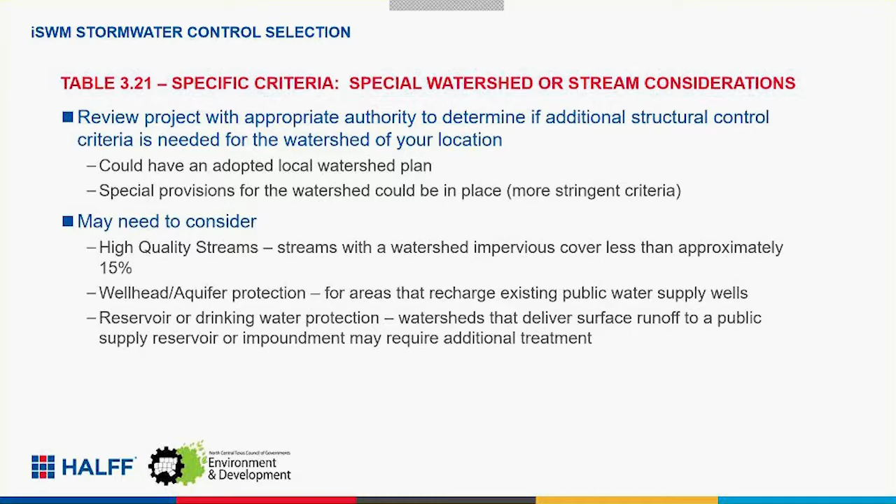You could have some restrictions when considering where to locate your structural control. You don't want to put it in any location prohibited by law, or locate it in an area that's strongly discouraged. The city or municipality you're working in may have concerns about where you're going to place this, so you need to check and make sure it's okay. You may have to justify the location of the stormwater control within that area, and you have to obtain your local, state, and any federal permits before you can implement the project.

Sometimes structural stormwater controls must be set back a fixed distance from a site feature, so consider that as well as you're thinking about your stormwater controls.

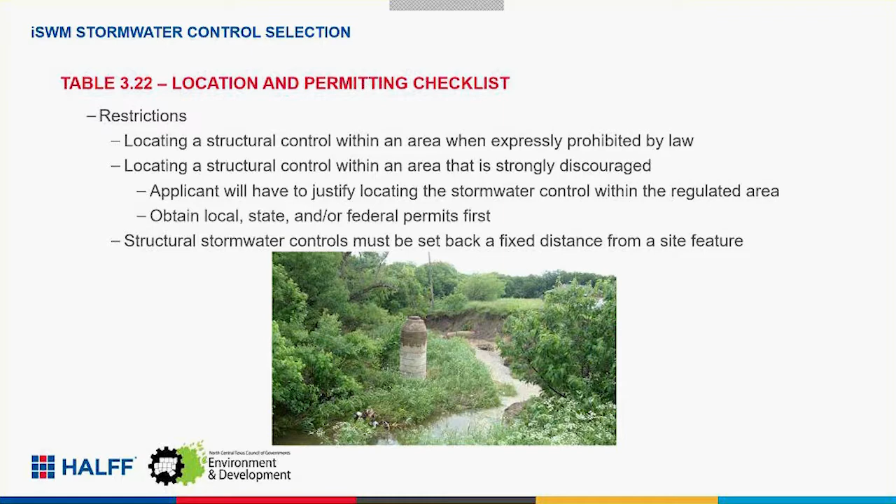There's another checklist in here - it's not a matrix, but it gives you different things to consider for where you're putting your stormwater controls. You may have issues with jurisdictional wetlands or stream channels - those are regulated by the U.S. Army Corps of Engineers. Water quality impaired bodies and groundwater management areas are regulated by the TCEQ.

You could have floodplain areas on your project. The local authority may require a stream buffer, like Ben talked about - you can never be too far away from the stream now. There may be utilities to consider, TxDOT roads, local roads, septic drain fields, structural control setbacks, and water wells. There's good information in here about each of those categories that you can read in Table 3.22.

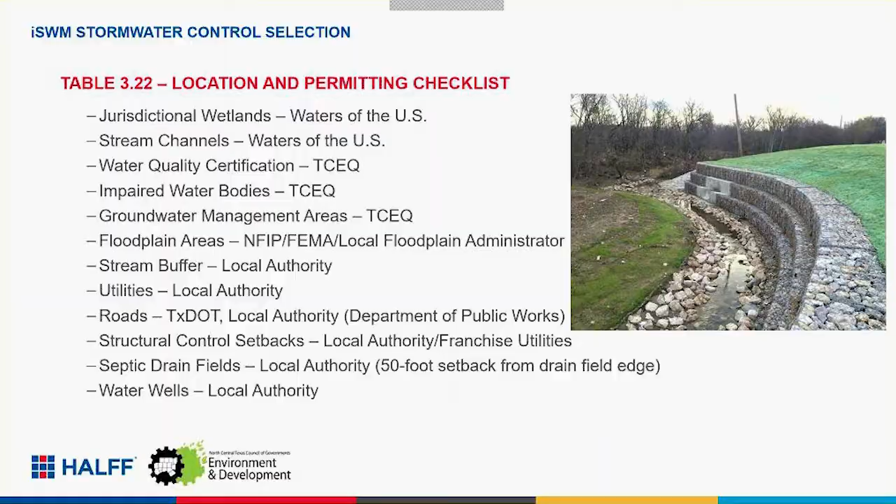I'm going to quickly go through an example, and I think we'll be done. So consider a site in the COG region. It's an undeveloped site, planned to be residential. You have a site slope around 10% to 12%. There's a major utility line crossing the site that you have to consider for your development. You did your downstream assessment, followed Ben's rules, and it shows that detention is required. The municipality has a stormwater quality criteria, and you have jurisdictional waters of the U.S. on site, but your downstream receiving stream is stable.

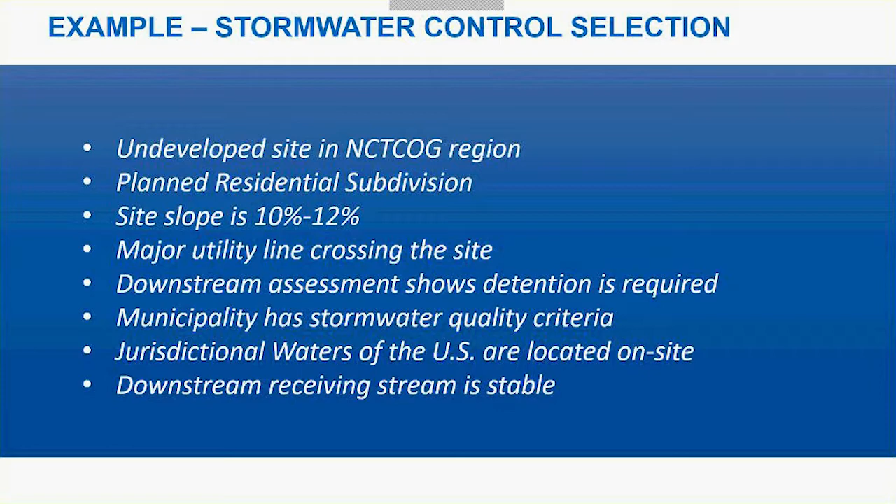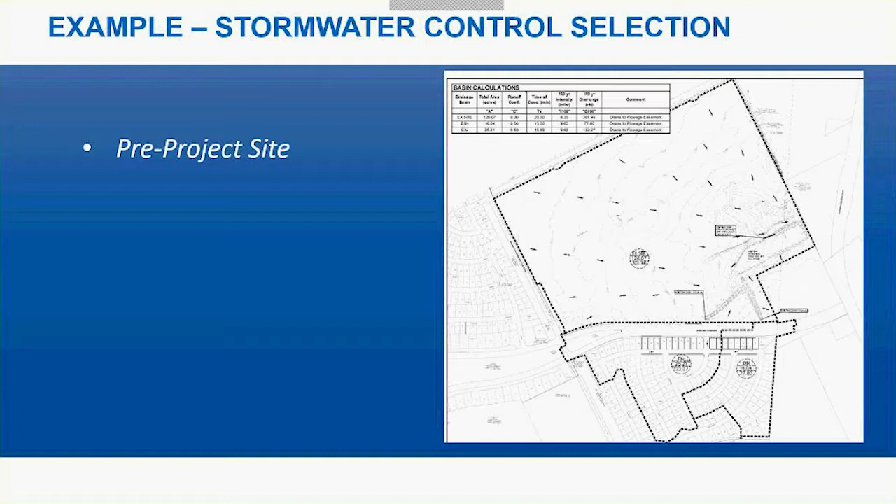Here's an example site. You can see all the existing drainage area - the existing site drains down to this area right here on site. So if you go through the matrices, first you look in Table 3.15, stormwater treatment suitability.

Ponds and wetlands are primary control structures for both water quality and flood control, so maybe that's a good option for you. You're thinking about detention, but that's only a secondary control for water quality - it doesn't serve that capacity, and you have to meet that requirement. So you could have a combination of dry detention and ponds or wetlands that the site allows, or you may need just all ponds or wetlands.

So you've kind of chosen ponds or wetlands. You're going to go to the next table, water quality performance, and here you see the ponds and wetlands both have an 80% TSS sediment removal rate, so that meets your criteria.

You go to site applicability, the next table, and you see for ponds, the maximum site slope is 15% - that works for your site. For wetlands, the site slope max is 8%, so that may not work for your site. So you decide you're just going to use ponds moving forward.

You go to Table 3.18, implementation considerations for ponds. Ponds are allowed for residential subdivision use, so that's a good use for it. Multiple ponds can be used to serve both water quality volume and water quantity control. So you design your site - you have one pond here, and it's connected to a smaller pond over here.

This is where your wetlands are, so you're trying to avoid those areas. Everything drains through those ponds, out through here, through the same location where it drained before. The only thing you've got to be very careful with the ponds—I think this is brought up in the iSWM technical manual—is you're going to have to have adequate drainage to keep it wet.

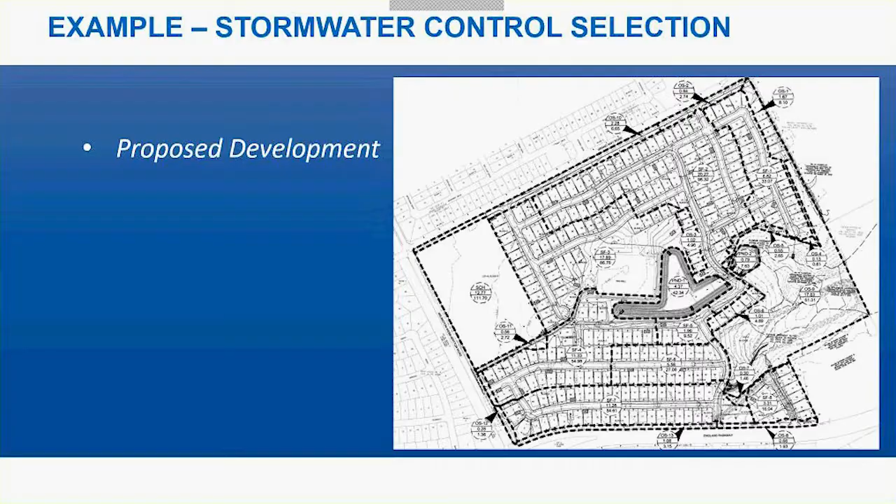All right, so you go to your specific factors here. In Table 3.19, physiographic factors, you're in a low to medium relief area, so it works fine. The upstream pond is 8 feet of normal pool depth—it can be used as amenity and for water quality. The most downstream pond has 4 feet of pool depth; this is mainly for flood control purposes. It can control the discharge out of your site to make sure you're not increasing that downstream.

You look at the soils and the NRCS data—it shows C and D type soils, so a pond liner is most likely not required. However, it's recommended to get a geotechnical report done just to confirm that you don't need some kind of liner there. There could be some sand seams or things like that in the area.

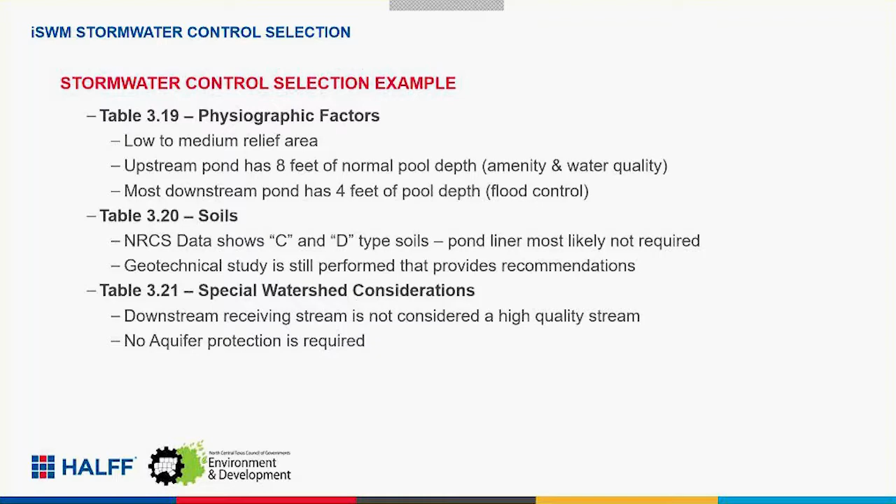Then finally, we look at the special watershed considerations. The downstream receiving stream is not considered a high-quality stream, and no aquifer protection is required. There is jurisdictional waters of the U.S. downstream—it's an intermittent stream. Your ponds only very minimally impact that, so you file your pre-construction notification with the Corps.

There was a major utility line crossing in this example, and your ponds are kind of set on each side of that utility line. So you have to work with the authority you're working with to make sure you can do your work in that easement, that the connection between those ponds works with the existing utility line.

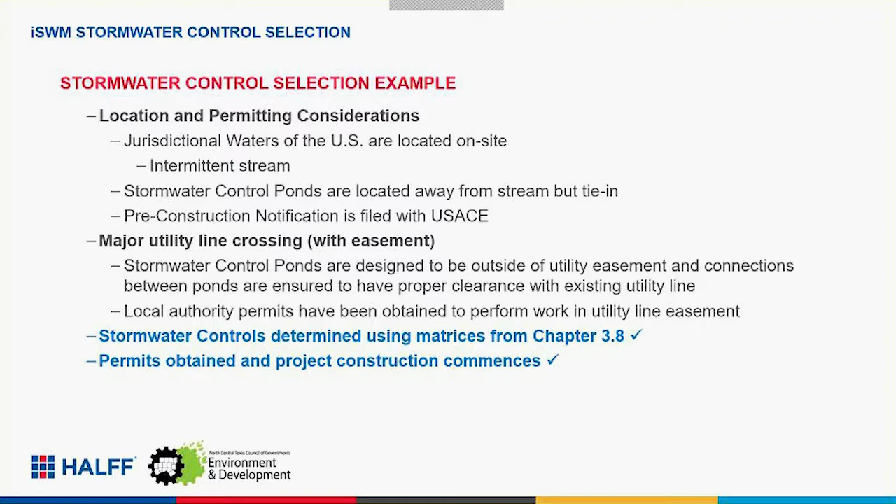Once all that's confirmed, you get your plans approved, you use those matrices to design your project, and you get your permits obtained, and then project construction commences. So that's just one example of how to go through each of those tables with a project that you have.

All right, and that's all I got. So if there's any questions on how to use the matrices to get into the matrix and out of the matrix, feel free to ask.

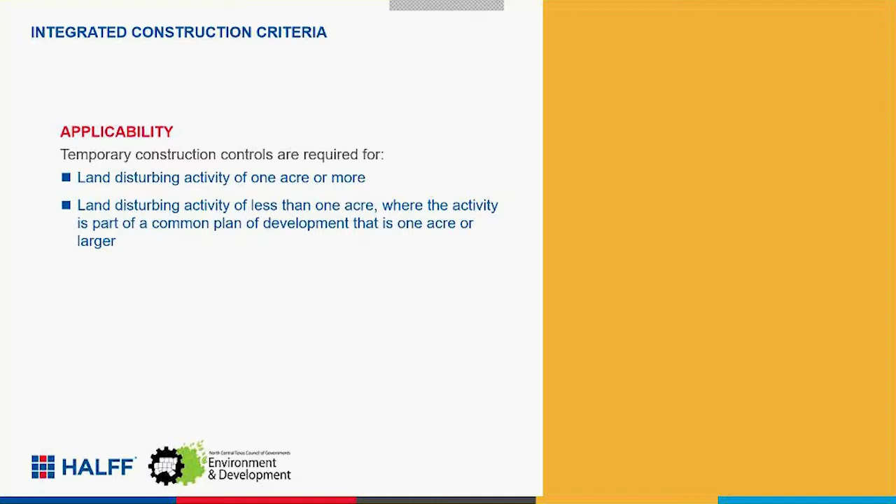I do think the construction criteria is a really key component of integrated stormwater management. We don't have time to get through it all, but I'll tell you that construction site runoff is one of the highest pollutants out there.

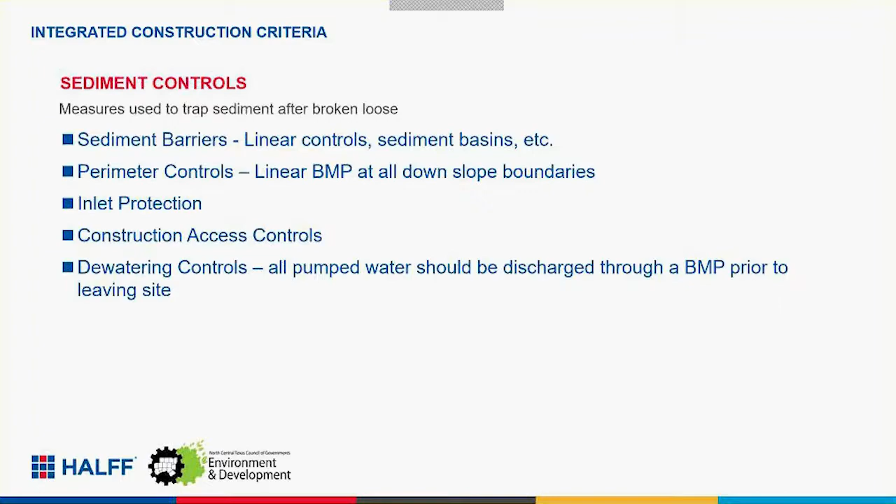I'll tell you that, going through it again for this presentation, the iSWM manual and technical manual has an immense amount of information for reference. Just like Lee was saying, if you want to know how much water you need in your watershed to maintain a level water pool of a wet pond, it's got that in there. You want to know how much drainage area you should be limiting to a silt fence as a BMP, it's got that in there too. It has all this information in there, and it's in a very centralized, great location.

I would say we do a lot of reviews of other manuals across the nation, and there's just an immense amount of information that's been developed by the COG in this region. So hopefully you got a little refresher on that, hopefully there's a little lessons learned. And again, most of these lessons we learned with many of you, so thank you all for that.